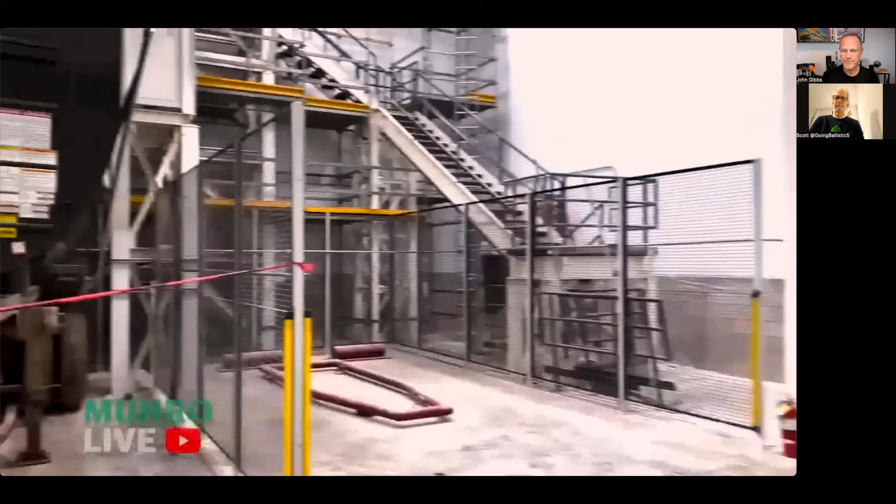Recycle everything. We had to make a separate scrap yard for the stainless. So this is just a scrap yard for the stainless coming out. We'll go out the door over here. We're about 80% utilization on the nesting.

Yeah. 80. That part was worth calling out because Sandy's mind just went. It happens several times in this video where you see Sandy's mind just explode from the information. Right. And I think what they mentioned there is, they get the blanks that are coming out and then they're cutting them. And he said that they're using nesting. That's why they're able to save a lot of material.

And for those who don't quite understand nesting, it's Christmas, making Christmas cookies, you get the batter out, and then you have this form. If you're really inefficient on how you put that form down, you're going to not have as many cookies and you're going to waste a lot of batter and have to recycle it. So the whole idea is to nest your parts as closely together so you use as much material as possible. And Sandy's a bit blown away that they were able to do 80% because I think he said it's usually around 60% or something like that.

Right. And Lars immediately responds and says, well, if you suck at doing what you're doing, then it does. But anyway, it's amazingly high. Well, they're pretty square panels, so they're kind of easy to nest. Yeah, I guess so. It's true. If you're making Christmas cookies which are square, it's a lot easier than the ones that are shaped like a Christmas tree.

Right. And they're going to talk also, we're just about to go watch them unroll the stainless steel. And by the way, I want to give both of us a little bit of kudos because we did suggest that they were doing laser welding on the door, and we're going to get to that part where they do the laser welding. That's going to be interesting. We were kind of right and wrong about a few things on there.

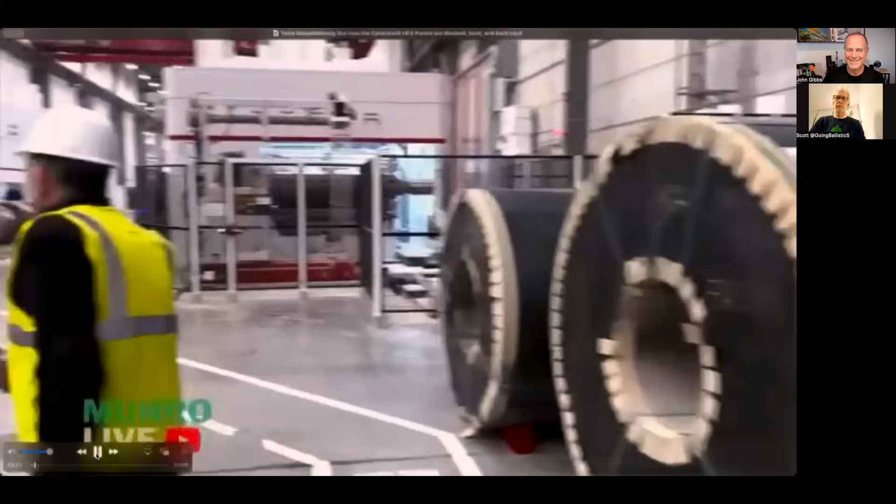Hi, good. How are you? Good meeting. Yeah, so he's the lead engineer here for our straightening line. This is Dan. He's our head of shop stamping. Hi. Nice meeting you. So we're just going to walk you through real quick. We'll come over here and we'll look at it. But basically, we get coils in, we feed them in on this side, and out on the other side comes micron precision level blanks.

Right. And that's worth pointing out. Micron, I mean, Elon said that in that open letter, or the leaked letter. He said we needed micron precision, and they say that multiple times in this tour. And that's not simple. I mean, we're talking about cutting things. No, it's not. It's just crazy.

And also the amount of care they take, and I know they specify A and B sides. So the A side is the side that you can see, and the B side is the inside where you can't. So they don't care about scratching that, or if it gets dinged up a little bit, that's not as important. So anyway. No, turns out Rich had me covered.

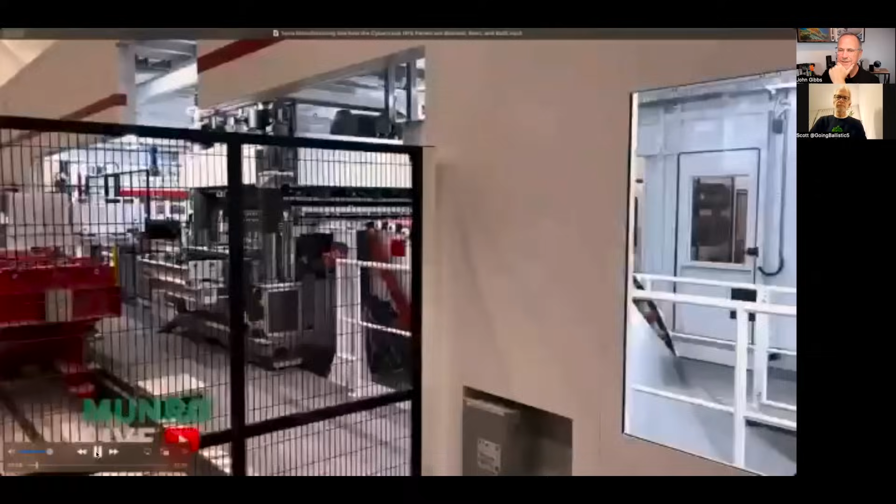So this is the first of its kind laser blanking line. What it does is it takes coils, it unwinds them, and it's taking out the internal stresses from the raw material. It's passing them through something called a leveler. All it's really doing is it's got a bunch of work rolls and they're moving up and down, and they're flattening the part. So I think that's worth pointing out because that's just crazy.

I mean, so you're going to do these different rollers, right, that undo it. And I think there is a YouTube video out there from Schuler that sort of shows a little bit of what that process looks like. Right. And of course, they're using probably normal steel, and this is stainless steel, so it's going to be a little bit trickier to try to get that process to work. And the other thing they're afraid of is that when you're doing that, you're potentially working the material, which just means you're going to be changing the properties of it. So you have to be very careful how much you do it.

Right, because certainly I'm not an expert in material science, but crystalline structures, if you put them under, because you might think like, oh, just roll it out and squash it and it'll. Well, you've heard of things like cold roll and stuff like that. Those are designed to intentionally change the properties of the material that you have. Right. But it sounds like pretty much they don't really want to change. They're happy with what they have here. Right. It came from the mill the way they wanted it, and they don't want to make any changes to it. So they have to be very careful. They have to flatten it, but they have to not flatten it too hard.

So yeah, clearly there's a lot of experimentation that went on. They talk about this. They're like, oh yeah, we started with 3 millimeter stainless steel. We worked it down to 1.8 and all this kind of stuff. Want to be careful that we don't work the material too much, because you do something called work hardening, and then you shear the part later on. Right. So this was a special development as well. This is something that's primarily used in mills. So we actually source it for a blanking line.

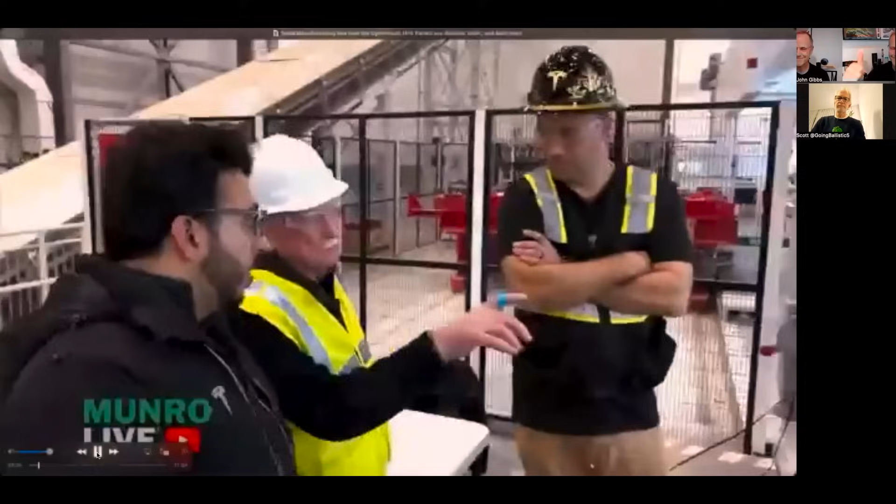So anyway, obviously they're very proud of this. They have been able to reduce the thickness of the stainless steel by almost half, 1.8 and 1.4. And later on, Sandy talks about how you just want it for bulletproofness because the doors are 1.8 and everything else is 1.4. But it actually turned out that it was side impact. So with the extra thickness, 0.4 millimeters, the doors are stiff enough to take up 75% of the impact of a vehicle side impact, which is very impressive. I have a feeling that being inside this truck is going to be one of the safest places you can be on the road.

Probably. Yeah, especially because not just the exoskeleton, but also the door frames and everything, all of that stuff is stainless. So it's just a massive block of stainless steel with you inside of it. So it should be pretty darn safe. But anyway, very impressive stuff watching how they're doing this. And I believe we move on to the laser cutting next here. That's where we started. Yeah, correct. So let's see, oh yeah, here we go.

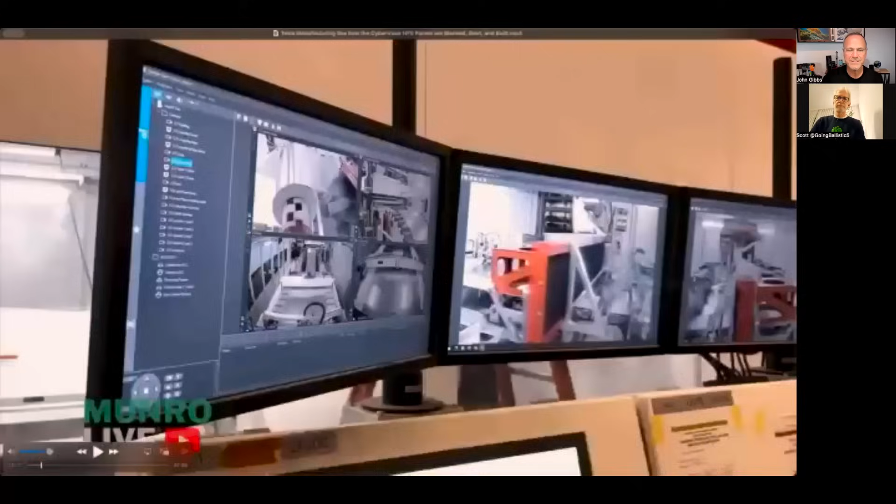It's actually designed for 3 millimeter, but it's good that we're not using it. That's where we started. Yeah, correct.

So, oops, sorry. This shows a good overview of the line. So you have the uncoiler, as I explained, where the actual raw material, we call that a coil, is being loaded.

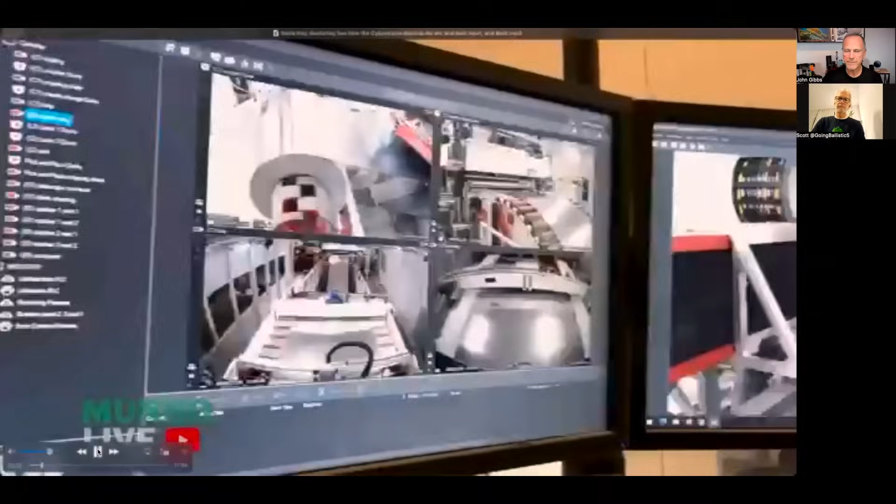It's being unwound as we speak. It's going through the leveler or straightener, depending on what you want to call it. Then it's going into the laser booth, which is what you see right over there. It's airtight, light tight because of emissions and whatnot. And these are two lasers working in tandem.

Okay, and right now it's airtight and light tight. That's very important. For light tight, it means there's always a possibility of a reflection somewhere in there that could come out, and someone just happens to be looking in the wrong direction at the wrong time. They could be blinded. So those things really are light tight. There's no way light can get out of those cells.

Yeah. And the airtight is also very important too, because as you're cutting the metal, there's fumes coming off of that. So they have to have some sort of a fumigation hood that pulls out all those toxic metals. So I'm trying to look. At some point they actually show a little bit of a close-up on the camera, and it shows it's cut at 1 millimeter. This was a special development with Tesla and Schuler.

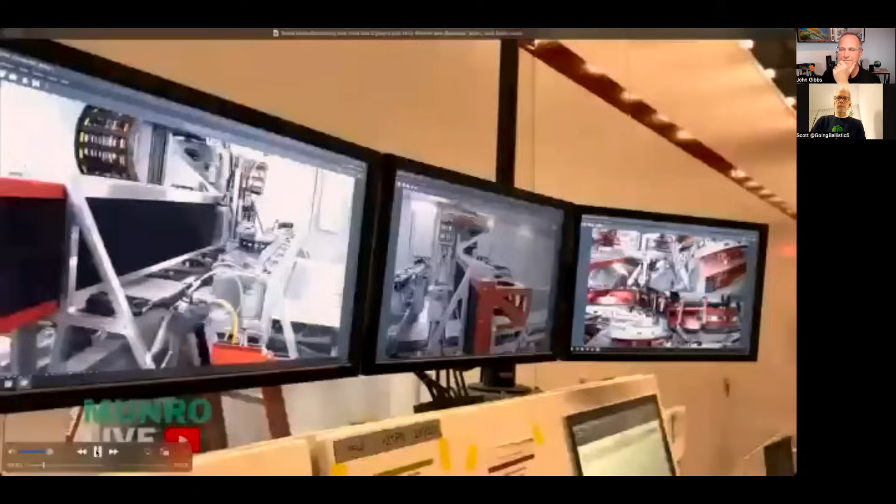By the way, big shout outs to Schuler and Kuka and Fanuc and one other one today. It was Trumpf? No, I think the three were Schuler, Trumpf, and Kuka. That are Sandy's three favorites. Yes, they are. I just meant that Lars and team, it was nice shout outs to all those companies. It was very cool.

So anyway, these guys, it looks kind of like an inkjet printer with the big cable that runs along the side. It's basically 2-axis. Yeah, it's 2-axis because it's a 2-axis problem. So he said there are two working in tandem. Do you have any idea, is one cutting from the bottom and one from the top? I think maybe they just have two to be able to do the production rate that they need. Oh, so one's working on one side and they work their way to the middle or something like that? Or are they just cutting different blanks?

There it is. Yeah, so you can see that really quickly. That thing's like bang bang. That is a very powerful laser cutting a tailored blank. And I assume it's cutting right through that just that quickly. Just zoop. It cuts really quickly and very precisely, of course. And when you think about that precision, even a laser has some width. So when you're cutting it, let's say a 0.5 millimeter of width, that means you have to figure out what the give is.

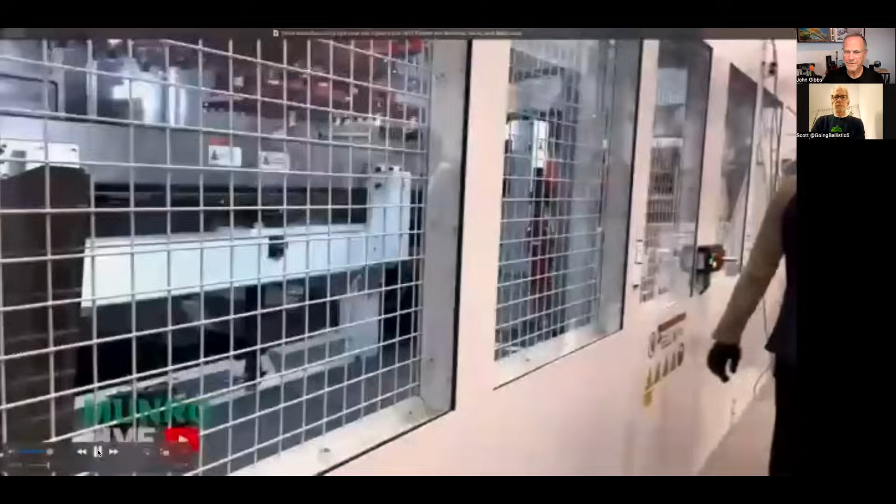I'm going to fast forward a little bit here. This is one of our transfer presses, the smaller one. We just make small parts there. We actually insource about 70% of our stampings for Model Y and Cybertruck. Wow. It's quite a bit. Well, when I did the study on why we should use castings, that study cost me a lot of time.

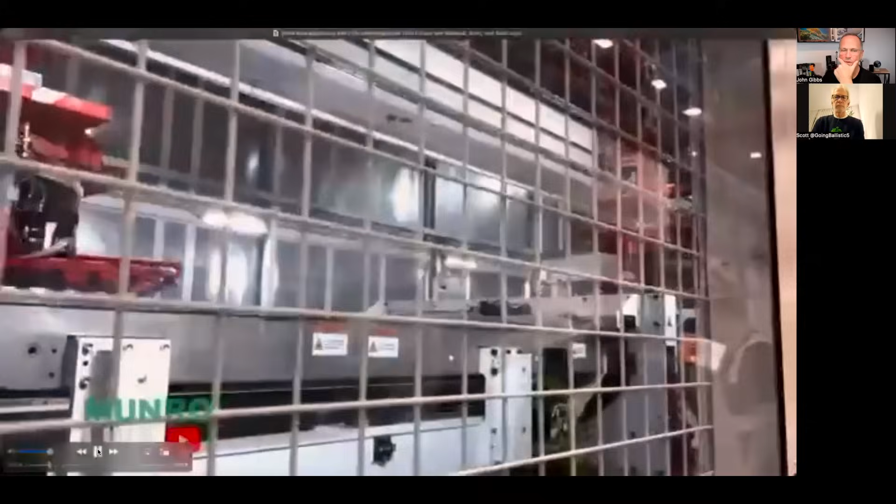So this is just separating the good parts from the bad parts. Because, as you saw in the laser, everything's being cut on one sheet. So the good parts are being separated, and the bad parts actually go right down there. That's what you see. It's going underneath and then up into the scrap house.

Scrap. So Scott, what do you think about the scrap house? Is that going to go straight back to whoever manufactures that steel and they'll just remelt it? Yeah, I think so. I would think that's probably the idea, that it could go back and be reused. So the chemistry of it isn't going to change that much? Yeah, I would think it would be easier to work with that than the original, where you might have to smelt it from original ore wherever they're sourcing it. Okay, that's what I suspected, but I didn't know for sure. Alright, scrap in there. Let's go through this a little bit faster here.

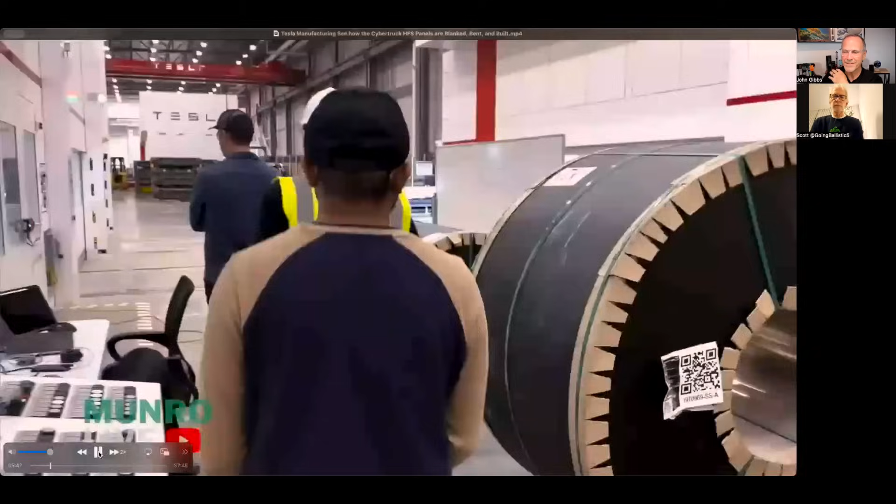There's some. You see, we're stacking them here. I think what he's talking about is that right now they're looking at all the blanks that are produced, and if one of them doesn't pass some sort of inspection process, they just reject it. I don't think he was talking about scrap at that point. When he's talking about good and bad parts, it means one of the parts did not pass. Still, you're recycling the bad part.

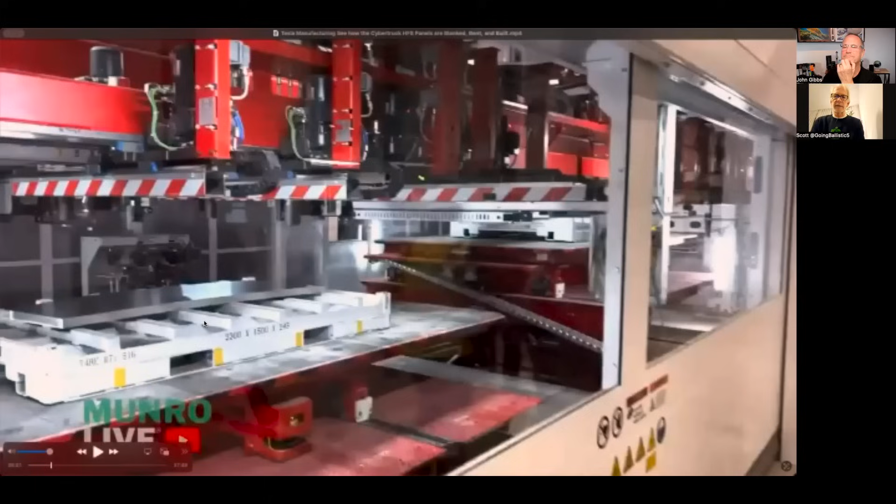But if I'm not mistaken, in this part he actually shows a whole bunch of these things stacked on top of each other, which was a little bit mind blowing, because if there's any kind of sideways motion, they're going to get all scratched up. Yeah, and that's what they were concerned about, just to make sure it comes down and lands flat. They talk about that explicitly, and as they say, this is hard freaking steel. There's another word, but it's HFS.

So what am I looking at here? This is basically storage. You're just carting them, bringing it together, right? Correct. So overhead conveyor belts, parts come through. Look at that one drop, and we just stack them up. It's very important. The only thing that really can scratch HFS is HFS. That's right. So we got to be careful when we put it down that we're not rubbing it against each other. Exactly. The only thing that can scratch diamond is diamond, right?

Right. So of course, that's the one problem with this stuff: if it does get scratched, you're gonna have to chuck it. So it's got to look really good because there's no paint to cover it up. You can't prime it. You can't do anything like that. It's just what it is. Other companies will have the stuff coated. It'll have a plastic film. No, correct. So this is kind of big stuff all by itself.

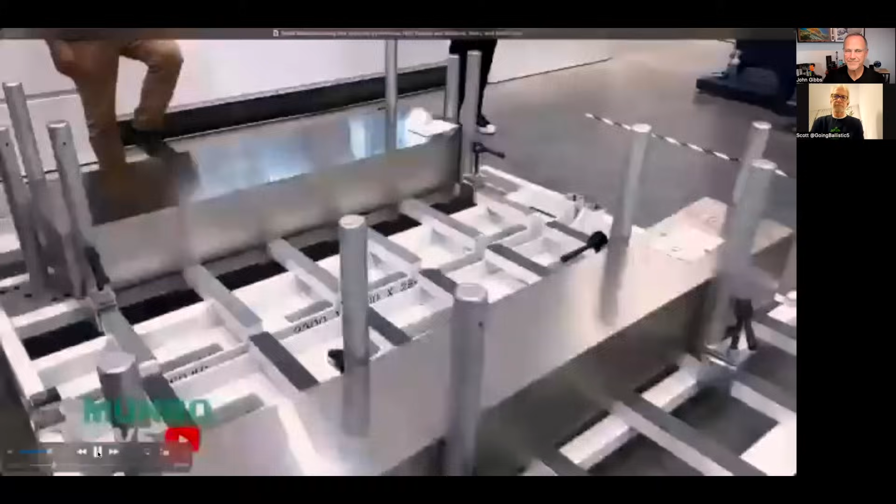So these are the different blanks? Yep, different blanks, all within accuracy. Tailgate, fascia, hood, doors. And then we have a measurement system. So we're producing hoods, and typically we robotically remove a part for periodic quality checks. So that's something you'd probably want to remove off the top when you're taking them out, just to make sure they don't get scratched as well. Would you do that with a vacuum? Yeah, probably a vacuum gripper of some sort, some automated system to pick them up.

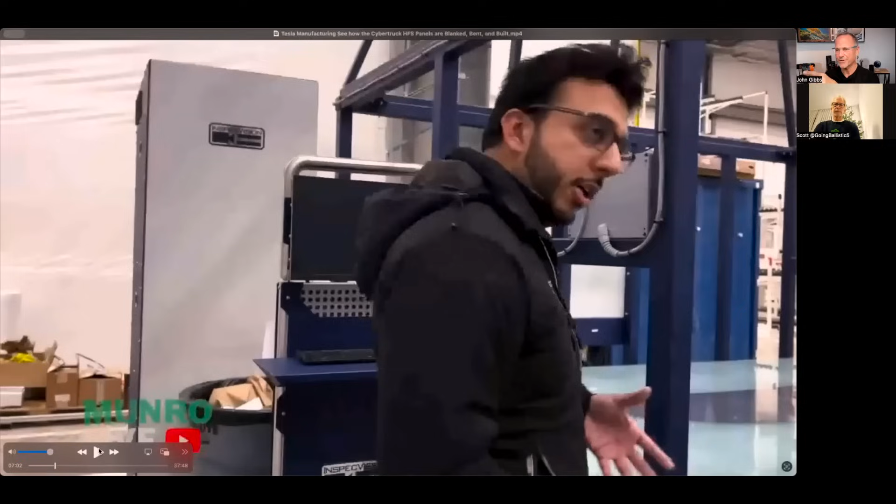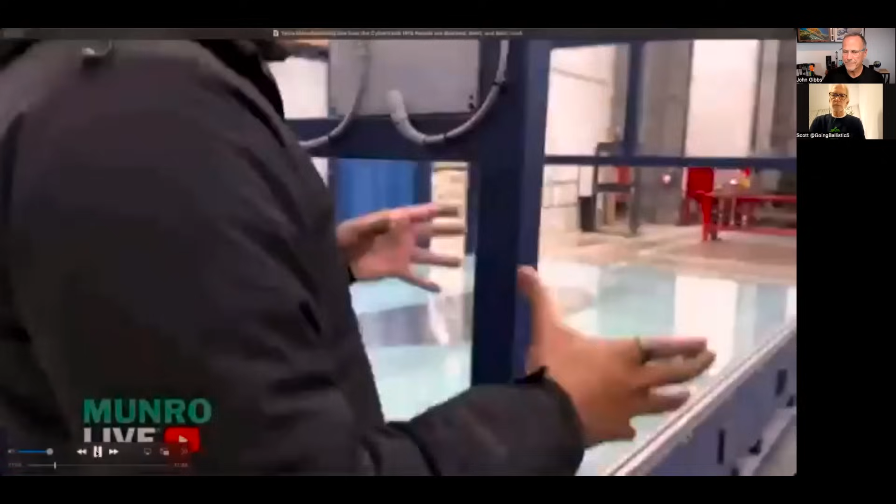It sounds like they are not testing every single part here. It sounds like this is a statistical sampling. Could be. So we'll take the part, put it on here. It's just a nice fancy 2D light scanner. And what it does is it compares the CAD that we're cutting to in relation to what we're actually producing. So this part's pretty cool. So it's like a giant optical comparator.

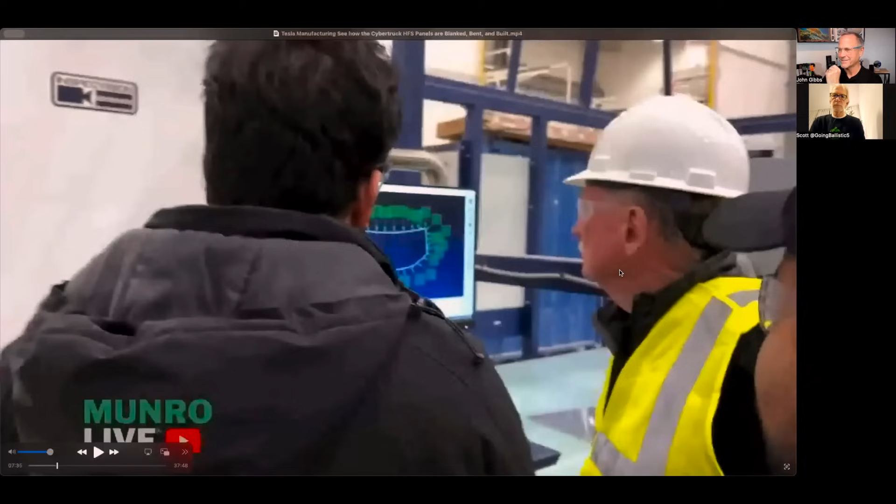So just watch your eyes, everyone. It's going to turn on. Takes a picture. Hopefully my arm didn't get in the way. No. All the points are within spec. That's measuring the outer contour. You see this level of micron precision here? It's really hard to see, but I believe all those little things are flags that say numerically what the error is. Very impressive stuff. So 7 microns. Let me zip through a little bit here.

Okay. All right. I can't remember what the next part is, but we'll find out in a second.

Melt center. Okay, good. So this is our die storage area, and I asked him to open up because the inner panels are also stainless, but they're formed, right? Because the best way to get section is to have an inner and outer, right? You get a lot more section. So forming, okay, so that's obviously important there, is that you've got the outside part that you can see, but then of course there's the inner part of the door.

Now we knew the door had an inner part, but we assumed because they looked to be stamped that they must have been aluminum. But they're not. They're stainless steel. That's so crazy. I mean, the whole thing was, it's really hard to stamp this HFS because it is just so freaking hard. So how are they doing that? And it's rather shocking how they do it when we learn about this.

So yeah, this as an A surface is kind of hard because you get drag marks, whatnot. And so we had to work hard on this process as well. This is our front door inner. It's a two out die. And you can see this coating. We went through a lot. Aluminum bronze coating here in the inserts to make sure that we don't get those drag marks on the stainless itself.

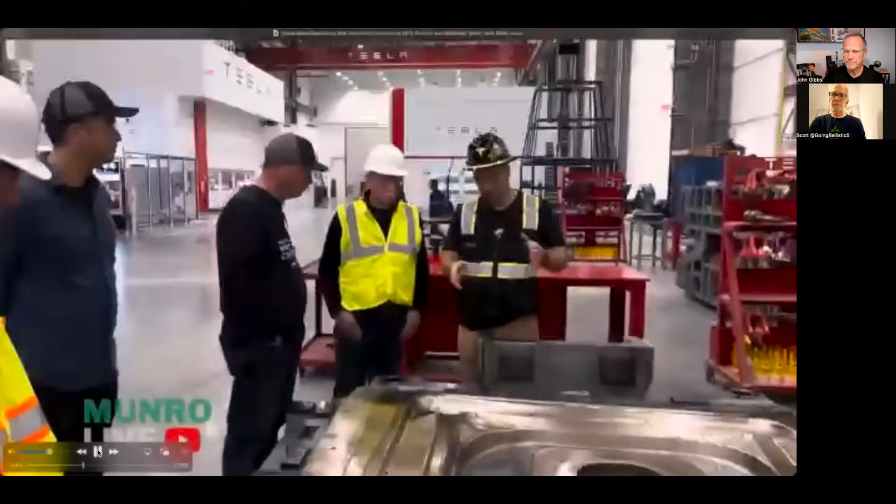And I think we have the world's fastest, first and only high-speed A-class surface stainless press. We're making 10 strokes per minute over here. That's it. First and only, they said. Okay. Yeah, I know, right? So it seems like they're doing it in one shot.

And the other thing that's shocking is what they coated it with, and that is bronze aluminum, which I guess they're just sort of repairing as they go, right? That's what they said. Yeah, they have to. So they probably have something really hard underneath it to be able to do it. And then they have a coating of this on there because the only thing that you can scratch it with is with something of the same hardness.

So you put something that's softer on there. But that kind of goes against your rational thinking. You say, yes, but if it's soft, you won't be able to get the forming, right? Because it's going to be too ductile. It's going to wear out really quickly. So it's like, wait a minute, how can you make it out of material that's absolutely crazy? And of course, we find out, and we'll let Lars say how many cycles they're able to get out of it.

Now, normally, the overall die itself is very expensive to make. And you have a CNC machine that's cutting it, and it could take a long time just to cut out one side. You're going to have both sides of the die. And then you make multiple copies of it. And of course, you have a lot of other different dies. So you would take that out of your press and then put in a different one to start pressing another kind of part, because usually you don't have as many presses as parts that you need to have.

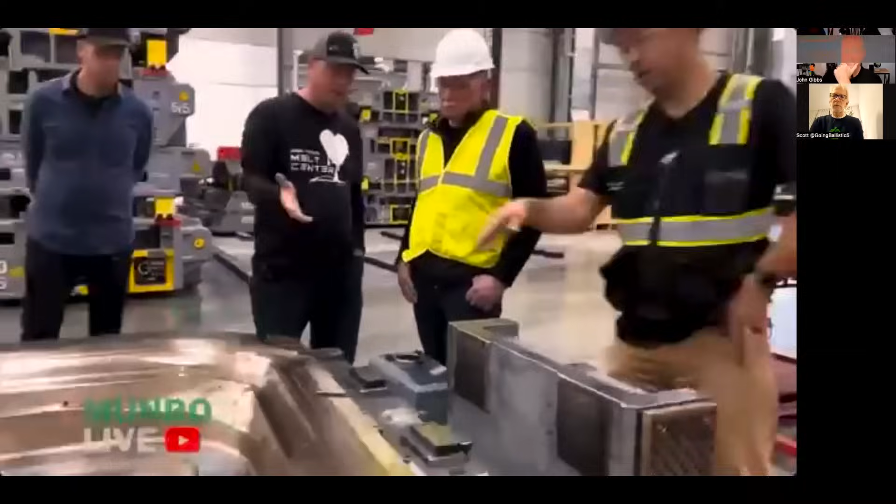So roughly 600 an hour at 100%. Again, this is the front door inner, like Lars stated, dual. And then this is the outer lower half. This is our draw in the upper half. Wow. Crazy. That's 10 per minute. That's pretty nifty. Isn't that nuts? Isn't that just absolutely crazy?

And then of course we've got kind of an opposing side, I guess, or is that the negative? Yes, two sides. The positive and the negative, if you want to think of it that way, the A and the B side. Right.

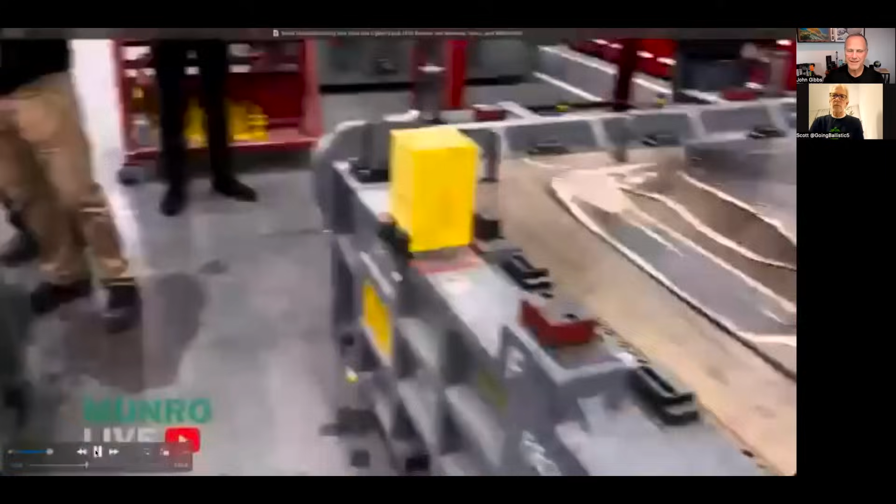I've never really stamped stainless steel without a coating. I don't think anyone has. There may be, but not me. We're all learning. Certainly not for an A surface quality part. There might be people making stainless steel pots and pans, but then they polish them, right? Polishing is the biggest cost with pots and pans. The stamping, deep draw, whatever, super easy. This though is something I've never seen before.

What'd you call this? Aluminum bronze alloy. How do you coat it? It's actually the whole material. It's not coated. This is aluminum bronze, the whole thing, and you can stamp with it. The whole material is hardened. We don't have a coating on top, but we found that it was the best material to use.

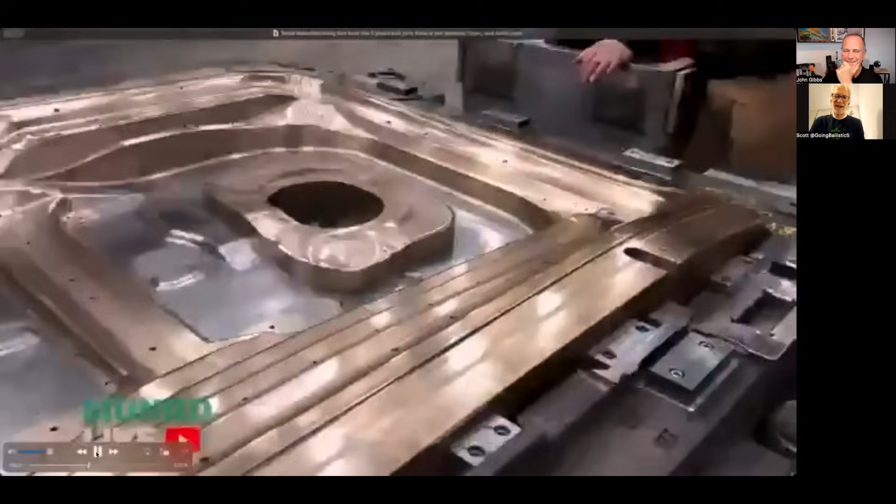So explain that to me, because it seems surreal that they can do that. For a second I thought they must have a hard material and just coated it. And he says no, the whole thing through is aluminum bronze. Wait a minute, how can that be? Then they somehow harden the surface on top with some sort of heat treatment to make it a little harder. But still, it means it's not going to survive a very long time. It's crazy. Let's find out what they talk about here.

You could hear Sandy Munro also going like, what? That's not possible. You can't make the whole thing out of aluminum bronze. This is first principles thinking here, people. Just because nobody's ever done it before doesn't mean it can't be done. You just have to think about it.

And part of it is also I think it's able to slip along it. He was talking about coating with a lubricant to make it a little easier. They may be doing that as well. But also that material allows the stainless steel to flow over it a little better and not get caught up, which otherwise would make the stamping very difficult. He specifically talked about drag marks. You don't want drag marks, tearing, everything.

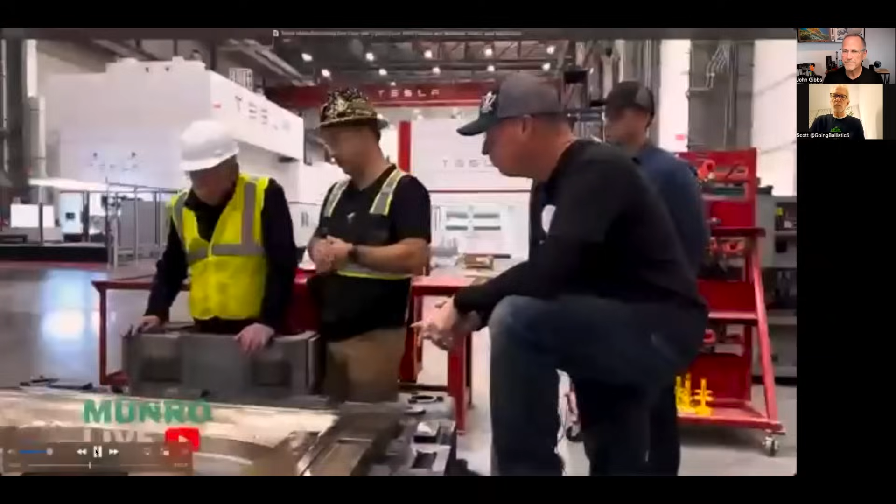We're still playing with lubricants, what kind of oils we're using, how much. So we're still dialing it in. Because when you use steel, we get drag marks. Aluminum can't last, right? So we obviously have to replace these inserts in a reasonable amount of time, but they're lasting quite a lot longer than we thought they would.

How many hits do you get on this thing? How many have you stamped so far, and how many do you think you're going to get? So far, we've probably stamped about 1,000 to 1,200 of each part. Based on our prototype trials, anywhere from 50 to 100 before we start doing rework. But you rework a stamping die nominally every time you take it out a little bit. We're not going to throw the die away, just rework it and make sure the finish is there.

Most of our PIST scores now are in the upper 80s. PIST is our points in spec, so we try and get 100%, a perfect spec, zero nominal. We're upper 80s, 90s.

We're currently in the upper 80s. Started in the low to mid 70s, now in upper 80s. Every run we try to improve. So that's worth calling out too, is that they're iterating on this. Now, what they were saying, and this is where he talked about 12.

Sandy was asking how many hits you get out of it, and we're hearing like 1,000 to 1,200, and then Lars is saying 50 to 100. Which numbers did you hear there? But is it 50 to 100,000 that he means? Is that like 1,000, 1,200, 50, 100? Yeah, because that's a pretty small number.

Because if they were doing it, what was it, 10 a minute? That's every 6 seconds. That's like 5 minutes. You're done. It's time to get reworked. 1,000 would be a little bit more, and if it's a number like 50, I don't think you're going to get a whole lot with such a soft material. Right. 100 seems like a small number if you have to keep on changing the dies out.

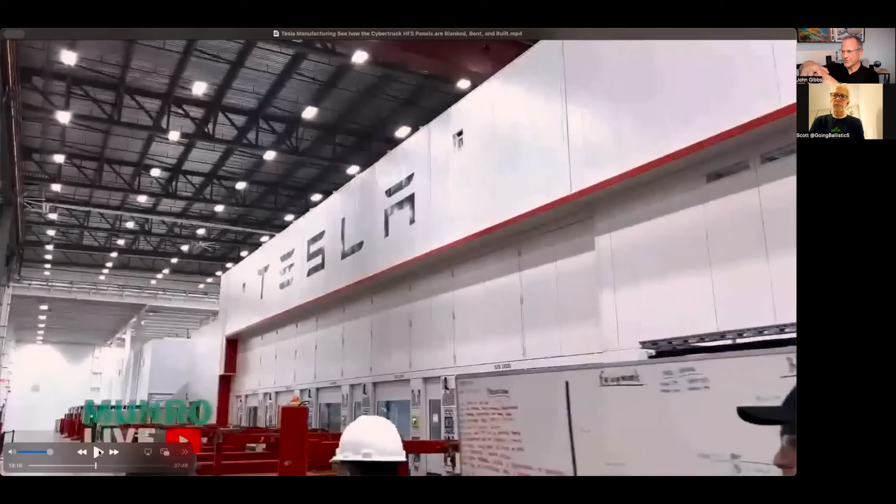So that sounds like that's what they're doing. They're heating it up, squishing it between there for 6 to 8 seconds, running water through it to quench it and get it cool again. So they're definitely changing the material properties of those panels in that case. But again, maybe it's a different kind of stainless. Maybe the outer one is the HFS and the inner one is not quite HFS.

Exactly. And if they're quenching it, they might be getting the material properties back that they want. So you get more of a liquid thing and then it recrystallizes as it cools. I'm sure they control very specifically exactly how fast they cool it, with metal.

So this is made by AP&T out of Sweden. We have a second one coming just to the west of this one. So you come in here, you see these ovens. This takes it off a destacker where it's centered, then it loads it into one of the 21 chambers. Then another one pulls it out and loads it into a centering table. It's centered, then it gets transferred by a last feeder into the die.

We can see the die over here if you'd like. Sure, why not? Is it not working right now? No, it is. Each one of those chambers is a different door with a different panel, heating up. We can go to the forming side. How much time does it take for heating up? We got 21 stations. So total strokes per minute on this is also around 10, 12, right?

So if you multiplied that by 10 hours a day, just to be conservative, that's 1,400 a day. That easily covers your 5,000 a week kind of target goal. So they're making them at a sufficiently fast pace. At 100% OEE. At 100%, yeah.

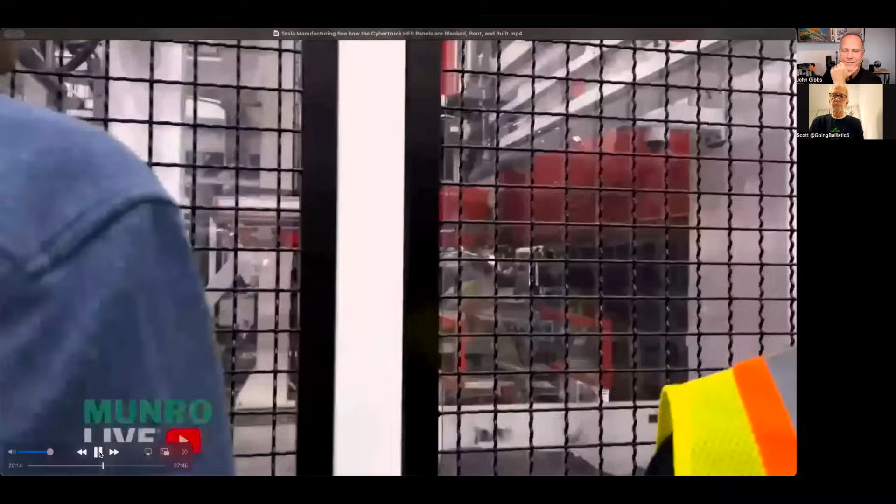Probably also the longevity of the dies too. Yes. So when they come out, come back in. Yeah, and that's the only way you could probably do it in one shot. Otherwise you'd have to have multiple stampings. Right. And it also explains the outer panels they talk about later. They're like, we can only bend it a tiny little bit before it starts to crack.

But obviously 900 centigrade is quite hot. So not melting, but it's hot enough that it's glowing, that's for sure. Yep. Yeah, it's going to be very soft. So yeah.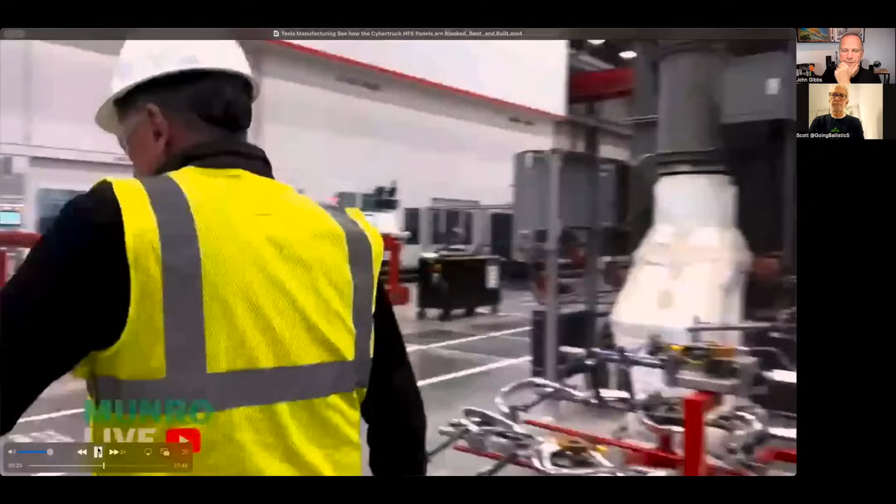So as you can see with all the equipment, we're ready to roll at high volume. Now it's just like, how do we ramp? Go slow, get quality right. So yeah, what do you think? I'll ask you that question. Do you think from looking at this that they're ready to go at high volume?

Oh yeah, they definitely have almost everything they need, and now they're just deciding what the ramp-up phase is going to look like. Right. How quickly they want to start pushing everything. So it seems like they're pretty pleased that they're getting the quality that they want, and then they'll increase the speed a little bit and a little bit and a little bit.

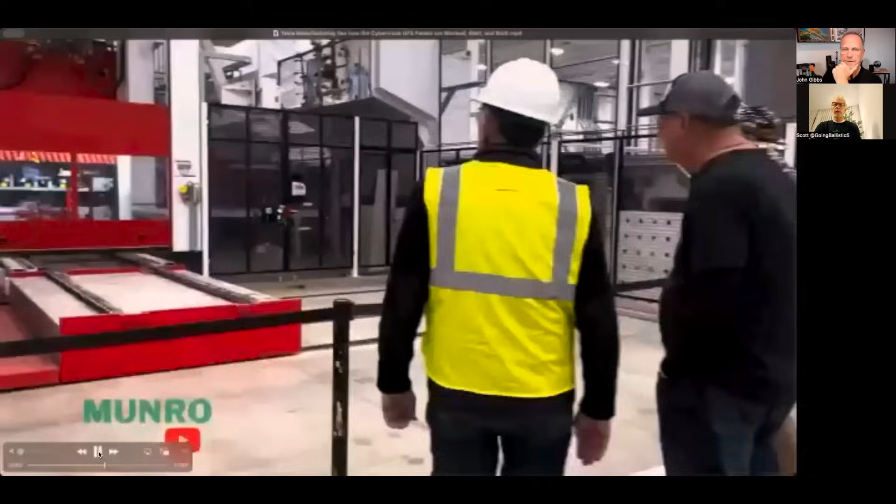You don't want to go too fast too quickly, because then you might break something. Right. Then you begin to learn, double check everything is going all right. So yeah, it's called a ramp for a reason, not a step. Yeah, exactly, a ramp.

And this is one of those things where, again, they could have delivered 10 trucks and been like, hey, see, we're in production. Sort of like the GMC Hummer, or the GM Hummer, whatever, it's like, hey, look, we're building these machines, but you're making 20, 50 of them a year. This is clearly not designed for this. They've clearly thought a lot about how to make on the order of hundreds of thousands of these a year. Yes. Exactly.

Right now we're doing inners, inner left. Okay, so this is them stamping the doors. I guess all these guys hung around after their shift too. This was very nice because it's clearly evening as they're walking around. Thanks.

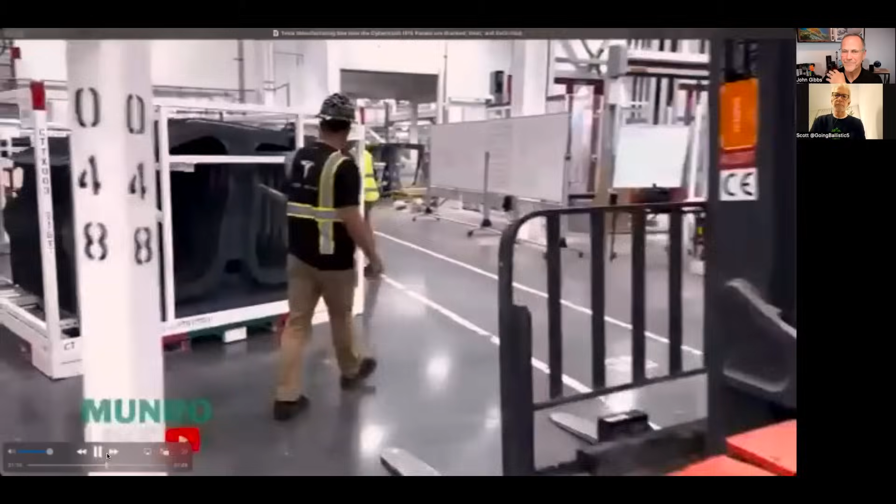And then you get your doors. And here's what they look like when they're done. This is a body side inner. Check for heat, it might be a little hot. No, it's not even warm. You know, it'll cool down fast.

We're actually going to unload this with a robot, basically an automatic racking system. They're going to automatically get put in these racks, and we're going to take them off with forklifts. Right now we're not 100% ready to do that yet. And then they go up this conveyor, right? Well, not these parts, all the parts. They'll go up here, and we'll show you how we form the stainless. So boom, we got our lift right up there.

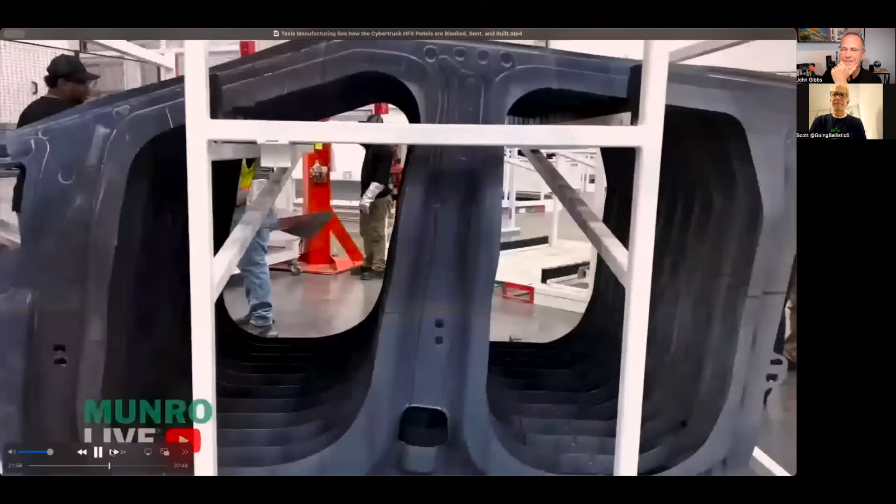We supply body shop. So obviously still things going. There's a later part where there's the bottom of a KUKA robot and no top, so there's just a base. So they're still working on all these things. Any other questions? No, I've seen a lot of this. No, I haven't seen one this size.

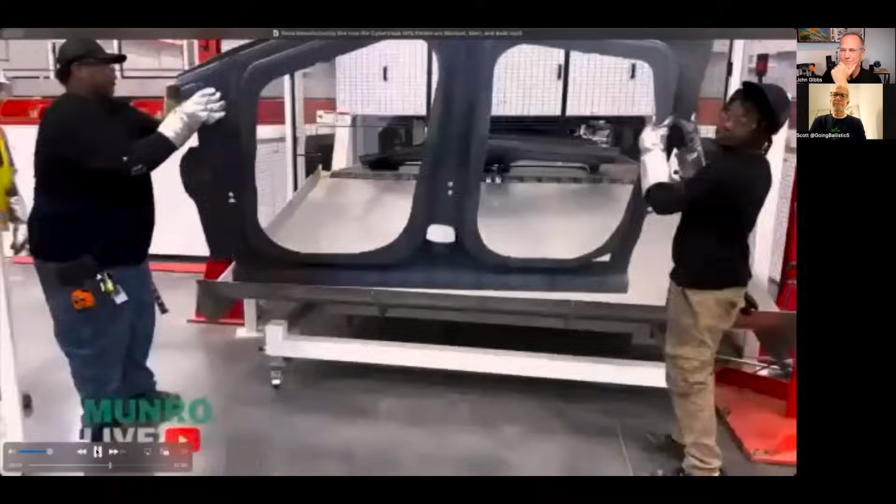We go up and over, Dan? Yeah, let's go up and over. So that's pretty impressive, just watching them pull that sucker out of there. So that part they're doing manually at this point is going to be roboticized. The panels that you saw, the blanks from the side, will come up here along with other parts. And then they'll move in. Right now it's all forklift.

You can see all our cherry pickers, that's the construction still here, where we actually have the body shop. Right. They had those big elevators. Everything's manual right now. Eventually they're going to be bringing more and more automation along that line. And it sounds like right now going up and down is not automated. They must be doing it on some sort of elevator or cherry picker.

But eventually it's going to get automated. Second floor here, that's unusual. Yeah. Well, it turns out those are the least number of parts now. We're down to just over 100. So moving them up isn't that bad, and they're bigger, so we get fewer trips, and they stack nice, so we get a lot of QPC.

So we come in here to mainline, but we're going to go straight to doors because we're running low on time, just to show you doors from forming to finish. So kind of zigzag. And of course, the doors are probably the hardest part to build because there's the most structure in them. We're only running one shift right now, and nights are doing cleanup and construction and final debug. So it's kind of quiet here, but Werner and the team were kind enough to stay for you.

Well, so we can get it running. Thank you, very cool. I'm sure they were pleased to do this. Get a little publicity after years of hard work. So let's see if I can. Yeah, it's always fun to show off what you've been working on.

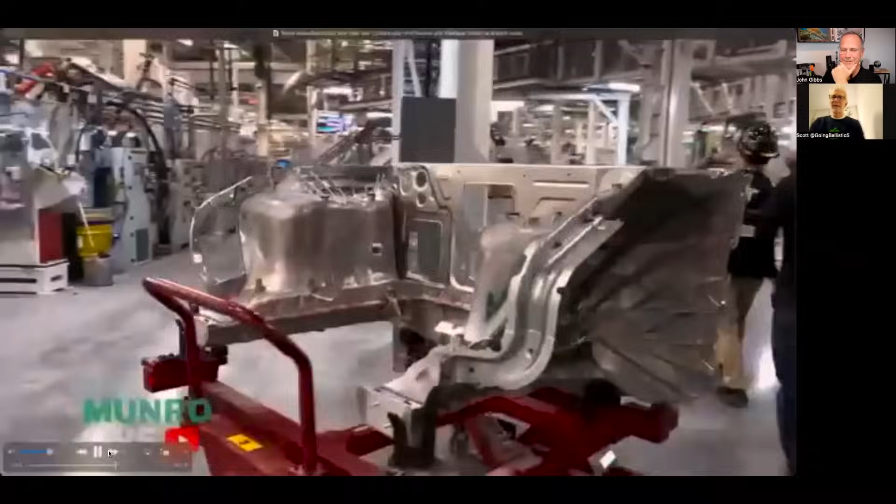And we got a little bit of a casting over doors here. Doors basically get built this way and go straight down to GA. The main line goes this way, and then gets transferred to our powder coat line. That does that black coating over there. We kind of have a flow.

But you don't use Elpo, right? What's that? Elpo, the stuff that everybody else uses. You dip the whole car in it, basically. No, you don't need to. It's a soft E-coat with a wet powder just for that black area. So we only have one oven. We do E-coat it, basically to seal it and cure the sealer. And then, because the door rings are that boron steel, we need to coat it. So then we put the powder coat on for the aesthetic.

Okay. So all of that black stuff we saw in the factory tour, if people haven't seen that, watch the video, I'll link it at the end. But it's a powder coating. So pretty standard stuff, it sounds like, just to protect it and give it a nice look.

We'll go this way? Yeah, we want to go to the rear door. Okay, we'll go here. I know that this bending line was running dry cycle earlier. I think the other one next to it, rear door, is actually running. Okay, let's go see the rear one. So we'll talk dry cycle, and then you can show them the rear one.

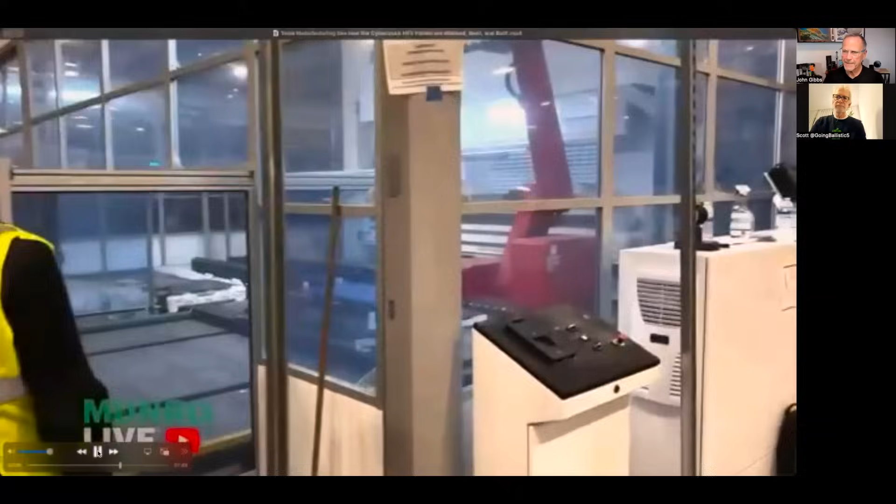So this is our TruBend. It's from Trumpf, we worked specially on this. This is the air bender I was telling you about. So cool. This is dry cycling right now. We have one of these for each panel. And how it works is, we'll come in close. Currently we're running dry cycles, so you can see any faults when we're off. It'll pick up the panels here from the stack that the guys made in blanking. Picks up a panel, and now it's about to pick up a fake panel.

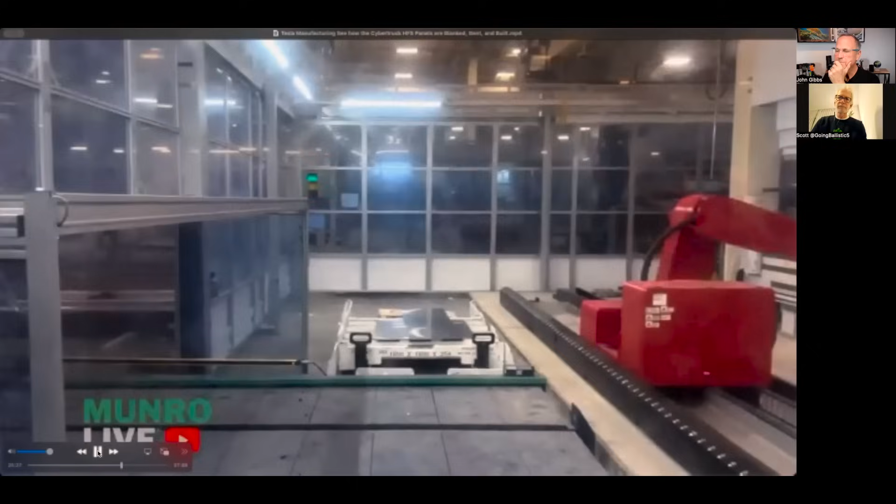So it picks up that panel. Looks like it's got suction cups. We'll show you the one working over there. And it's going to bring it into the TruBend, which is from Trumpf that we worked with. As you can see, the brake bend comes down, but that's the air bender. It has that V shape with the air flowing on either side to keep it floating, so you don't get the mar marks. Flips it around, it'll do the other side. And once it's done, it takes a good part and puts it back here, and it'll come out here. So we wanted to show the dry cycling before we look at the actual part, so you get the idea of the movements. It's very cool how it does that.

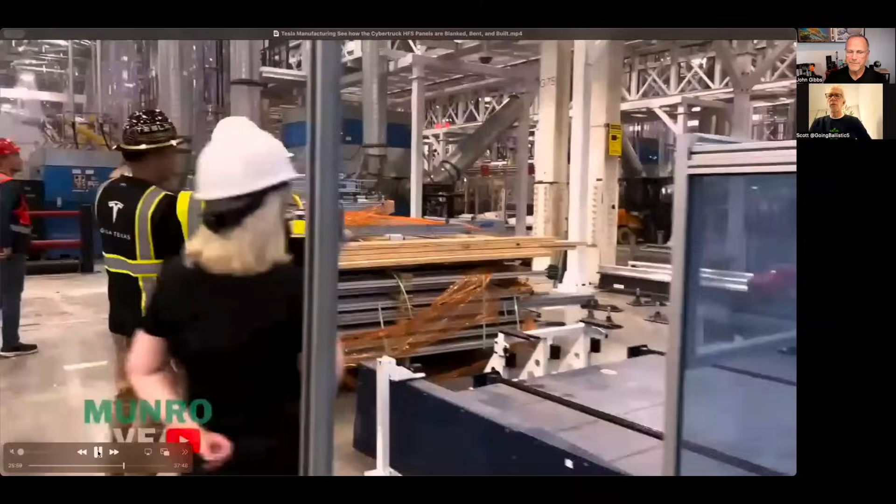Now, again, we're in the middle of commissioning all our transfers. That's a very custom kind of robot arm specifically for press brakes like that, because I think it's like a 5-axis arm, since you don't need all the degrees of freedom you typically have, specifically for press braking. And press brake is something people used to do manually. You take a piece of sheet metal, you put it in there, you push down the press, and then you learn to kind of bend it.

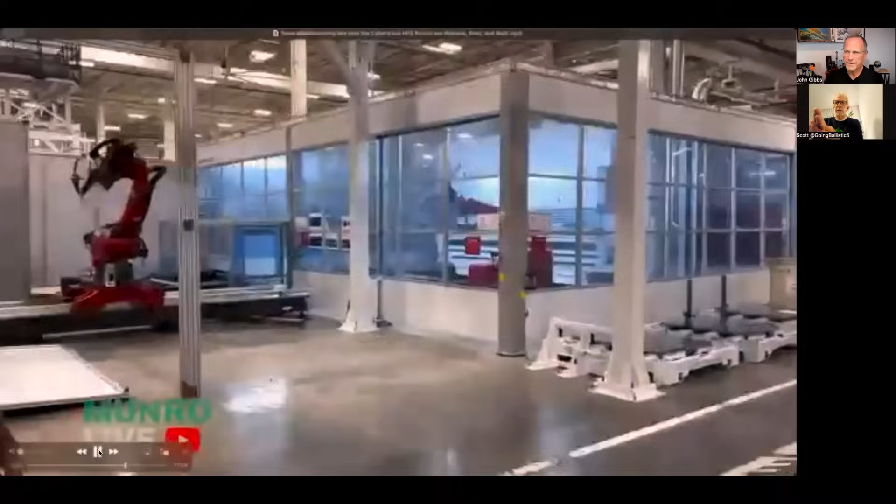And it was kind of a learned technique on how to do it. And it has to be coordinated with the movement of that die that comes down, that actually does the press into there, and a kind of coordination with it. And by understanding how the metal is going to be deforming, they're able to sort of change the movement of the robot to be exactly tuned to it. So that's why they're a very specialized piece of equipment, where it's not just a movement of that arm, but it's also figuring out what's going on with that press brake when it comes down.

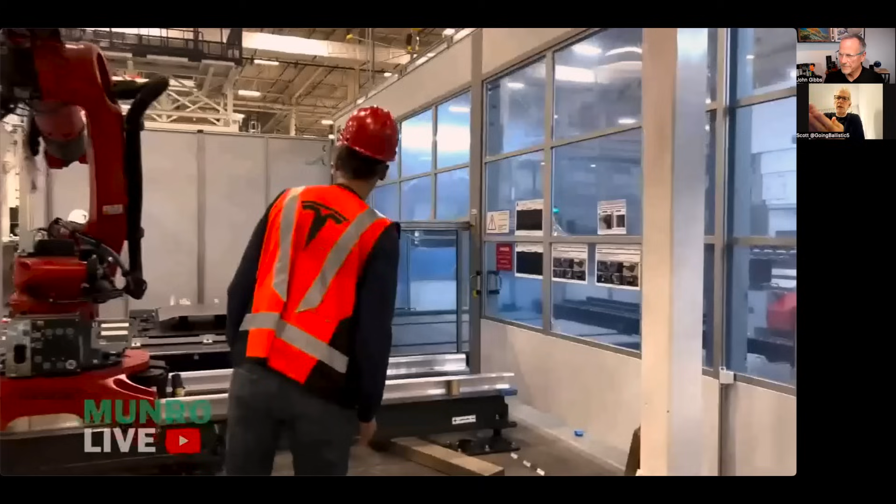And it sounds like they were saying that the part underneath, because you've got this die that's coming down the top. There's that little V shape, and they make the air coming in underneath it, so the metal never really comes in contact with the part underneath. That's the A surface. And they put it in, they bend one side, and then that arm is designed to do a 180, whoop, brings it right around, and then you do the other side. Which is exactly what we're going to see here.

And I believe they say that they're running at 25% speed here. So it's going very, very slowly, so I'm going to, let's see if I can, well, no, it's 5X. Oops. I guess I'll 2X it here, but anyway, so you can see that that little piece in the middle is the V shape, and that gets the inside of it. And then it spins it around, and it presses the other, and there you go.

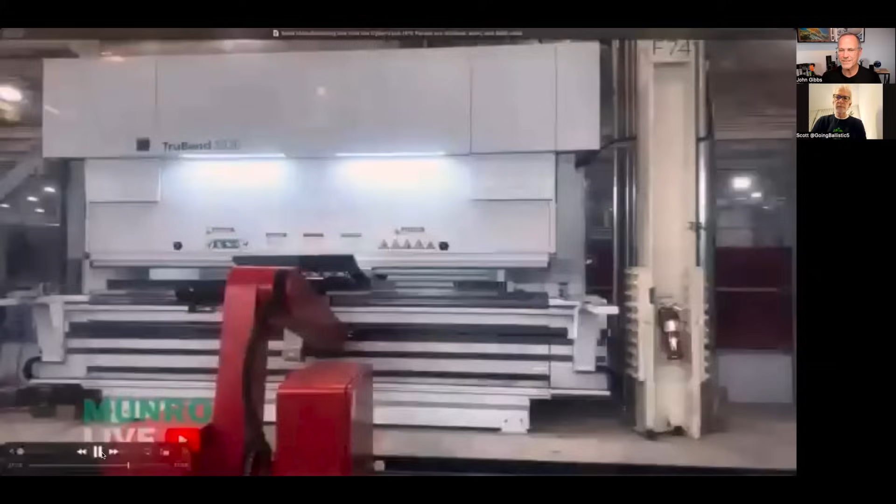And it's very interesting, because you can see it kind of working it back and forth, getting just exactly the right shape. Sometimes you have to do it a couple of times to go around there. And so the arm itself is 5-axis, and then it's on a track, which gives it kind of a 6th axis that allows it to go back and forth to where it's picking up the different stacks.

Yeah. And of course they also talk about how there's lights and everything. There's detectors that are looking at it to make sure it's bent the right amount, because again, one of the things about steel is you can bend it a certain amount, and then it'll give back again. So you have to over bend it a little bit, let it relax, and then figure out if it came back the right amount.

Yeah, actually, I might be wrong about that arm. I think that arm might actually only be 4-axis. I'm trying to look at it. It's like 1, 2. It's gonna be 3 there, and 4. I think it's just 4, because basically what's normally joint 1 and joint 4 in a typical robot arm is not in that one. So it's a 4-axis. So it is actually a total of 5, including the track.

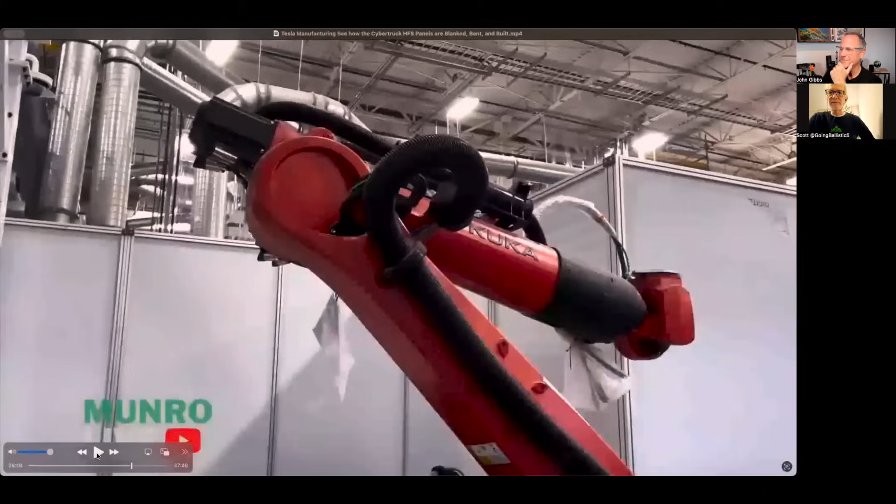Yeah. Okay. So it comes out. We'll put down the clean part here, and here we have the robot. Not quite ready, but wow, that base is huge. So there's the robot up to the part where the end of arm tooling is, I guess. So big boy. Why is that needed? They do make them bigger, actually. No, but I mean, why do you need it that big just to pick up a door? That panel is not that big, so it seems like overkill.

For the payload, it might just be the volume, the fact that you've got a very big part that you've got to pick up from one place and move over to somewhere else. It's more of the work envelope problem as opposed to the payload. And the other thing is, remember the payload also includes your end of arm tooling. So the end of arm tooling that might be needed to pick up the entire door could be quite heavy. Or that outer frame that they were showing, that itself might be pretty heavy.

Okay. Yeah, because you also have to have the vacuum nozzles and all that kind of stuff. So there's a lot of material. Yeah, and I'm not sure if they're using, well, what was this for? Is this for the outer panel of the door? I believe they said they were just going to pick it up and move it. That's what this thing is for. Oh, okay.

Because that should be pretty simple, because that's not a really big piece. I was thinking of those big door frames that we were seeing earlier. Right. But again, I don't know. But again, you might be right. It might have to move it such a long distance that you need a bigger one. Yeah, it's the reach. A lot of times the reach is going to determine the size, and then there's going to be a payload consideration also.

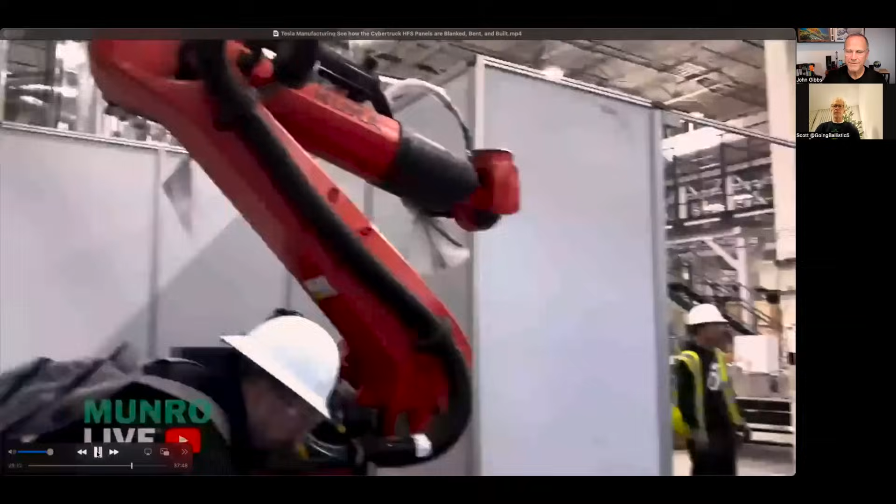Right. It's a good door. Let's do that. Yeah. So door comes out. Really cool how beautifully. And what did they say? Like 4 or 5 millimeters is the radius of curvature before it cracks. Yeah. So depending on where the arm is going to be, it's going to reach way over to get it. I assume it's going to be in a little bit closer, but you see, it does have to reach pretty far to be able to get that.

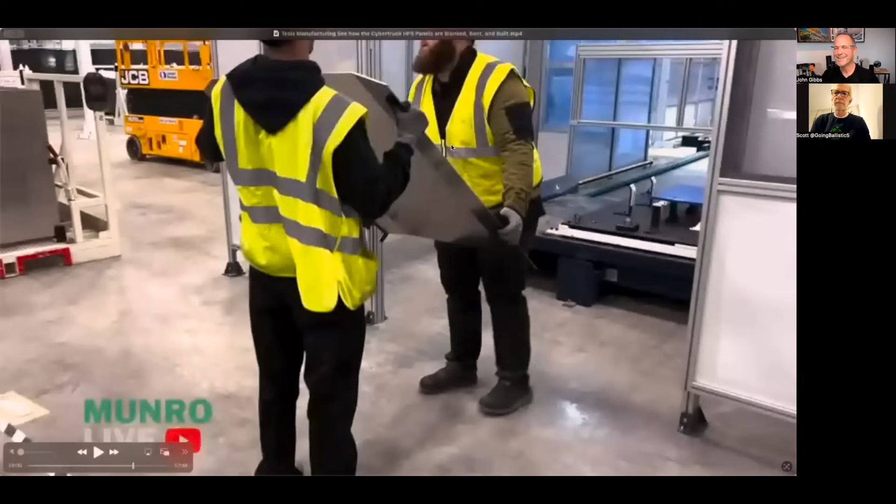Right. And there you can see, like, that's a pretty crisp bend right there. And obviously, I mean, this is not a light part. You think of, you're like, oh, aluminum on a door, that's very light, but it's taking 2 guys to pick this up right here. So it's stainless steel. Yeah. Steel, I think, is 3 times more dense than aluminum, if I remember.

Right. So what's the limit for factory workers? About 50 pounds per person, 45, something like that. Obviously they can lift more, but usually they don't want you lifting more than 50 pounds. Right. It's the same at the airlines. The reason why the baggage limit is at 50 pounds, you have to pay extra to do a little bit more. And then that suitcase has to be handled differently because 75 pounds is going to be a lot. Yeah. You have to remember that you got to do this for 8 or 10 hours a day. So it may seem easy, like, oh, come on, anyone can lift up 50 pounds, but try doing that for 8 hours straight. Yeah, that's going to suck.

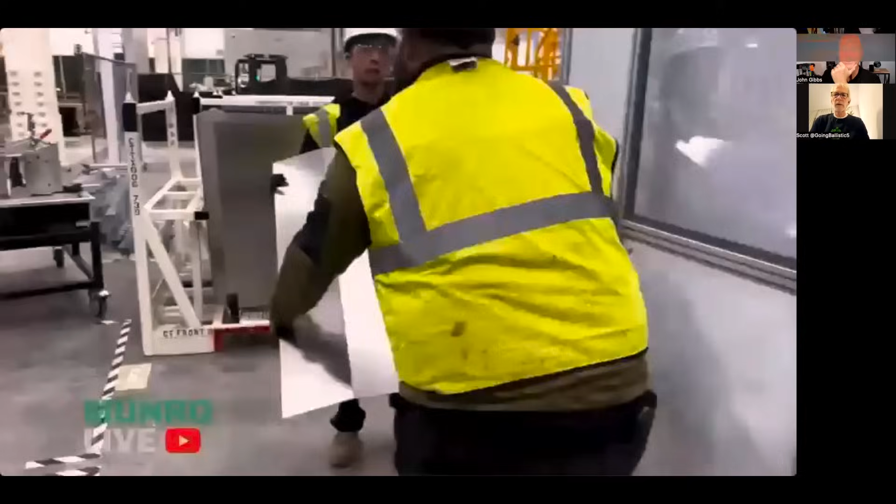So this is ready. As I said, right now we're putting them in the racks. Well, they ran out of racks. It really does look beautiful. But you want to put it in the check fixture? So also I put it in the check. The rack here, notice that the rack doesn't let them touch each other. So they're not just stacked up like books and rubbing and messing up. Yes, exactly.

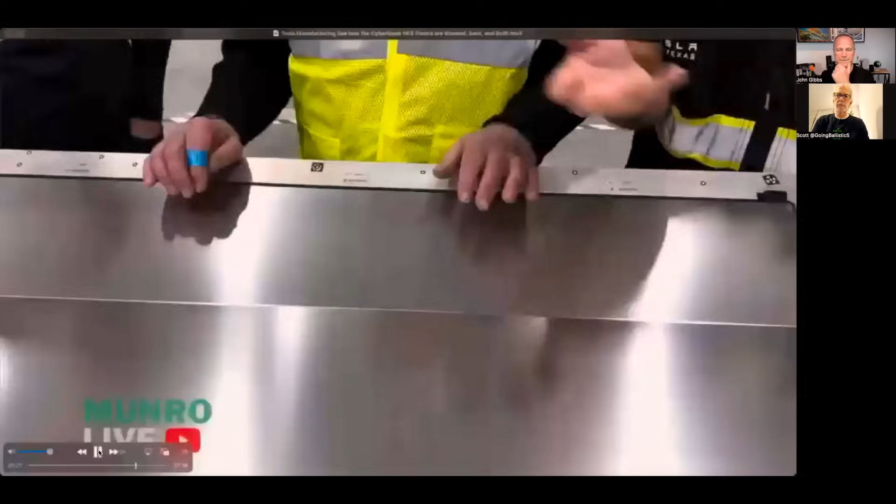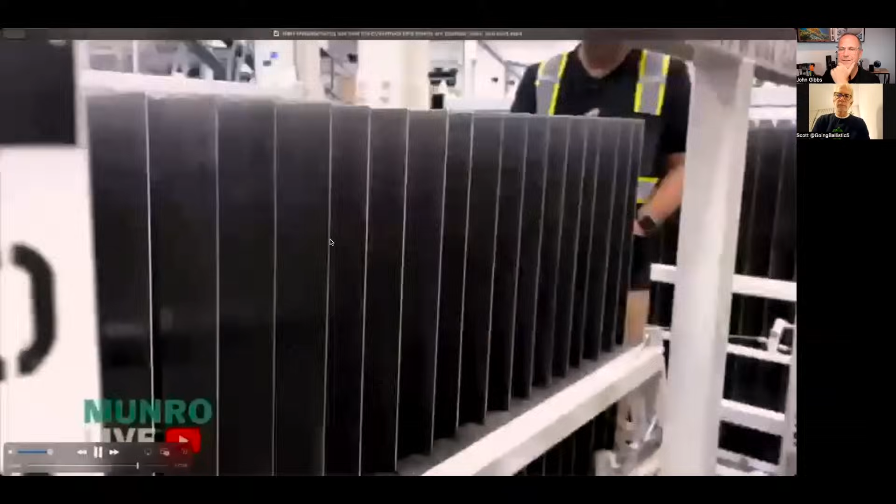Yeah, sure. Great. So I'm gonna speed this up just a little bit, but they put it into this little, I guess it's maybe a tester or something. Yes, right there, exactly. You can see we got a little more in here to validate the dimensions. What I was thinking about was just the outside bruising, not the inside. I don't care about it. You can see on these panels over here, if it gets bruised on the inside, no big deal. You can see where the air's blowing off the dust. But you come over here, nothing. So yeah, each one's got its little spot to sit in.

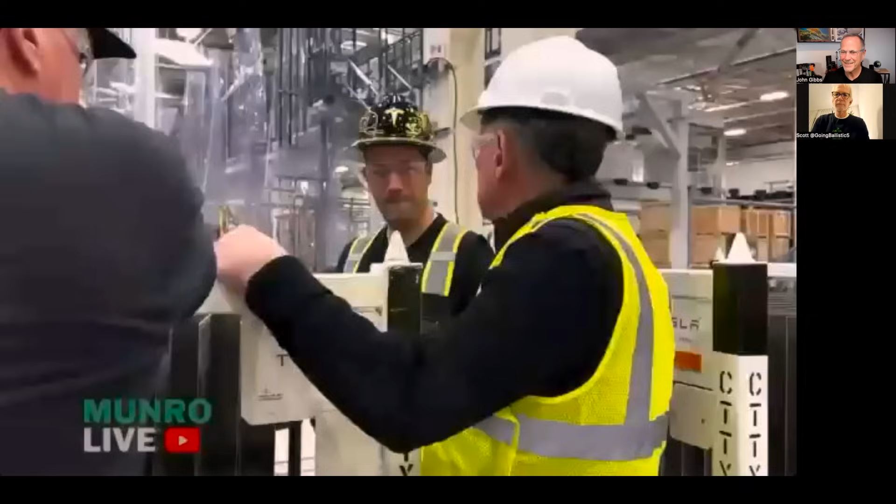Yeah, that's pretty amazing. You're using 2 of my favorite, 3 actually, counting Kuka. They're my go-to. Kuka, Schuler. Yeah, if I'm gonna do something, I hate screwing around with junk. And anytime a purchasing agent or one of those engineers with an MBA says, "Well, I got a good price on it," I have an expression. There's usually a reason. Don't save me any money. I can't afford it, and that's the truth.

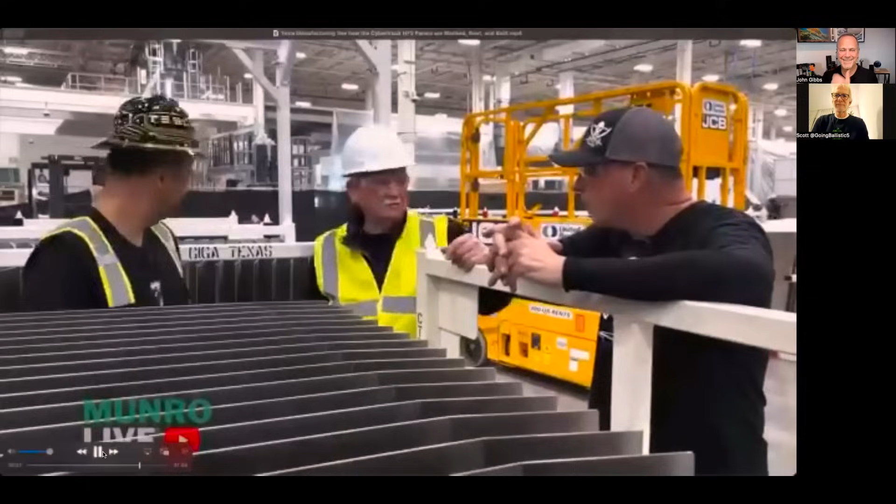By the way, these are 1.8 millimeters thick. These are the full real bulletproof. Everything else is 1.4 millimeters thick, other than the doors. Yeah. Well, you need that extra for the machine gun. Yeah. Well, the 1.4 is actually pretty bullet resistant.

Do you remember Salada tea bags? When I was a kid, my parents always drank Salada tea, and it was like a Chinese fortune cookie because it always had an expression on it. Right. I remember one of them that was on there was, "The one thing you can't afford is a bargain."

So that's exactly it. It's kind of true. It's because it's a bargain, you decide to spend the money, but otherwise you wouldn't have.

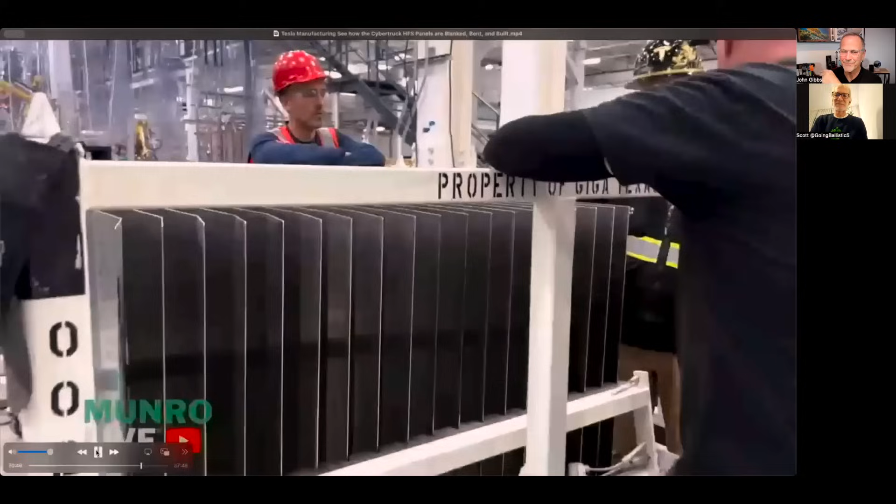But I think this is where he talks about the side impact crash resistance. It takes about 75% of the side crash loads right there, just through the panels itself. So that's impressive. So we wanted that extra thickness for the stiffness. I mean, that's just a crazy thing to think that somebody can T-bone you and 75% of that energy is dissipated by just that outer panel. Just the door, yeah. That's impressive.

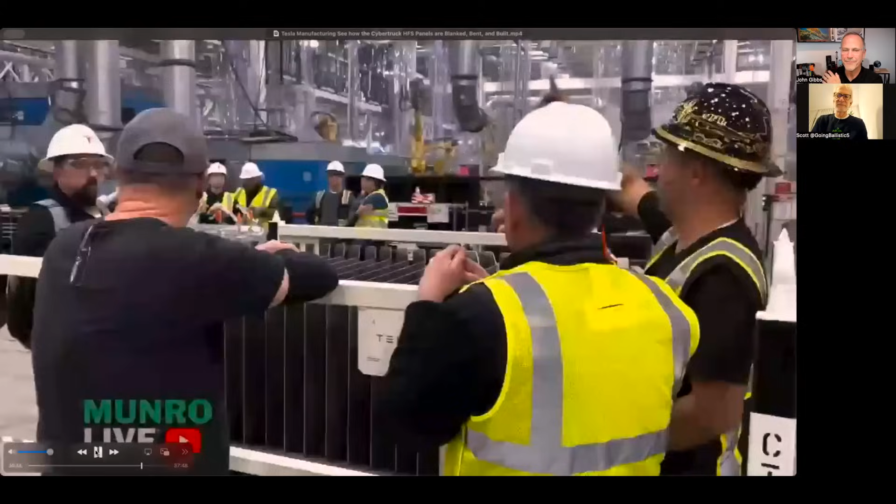So after it goes over conveyance, we'll go into the weld cell, and then we'll finish it. And then finally we get to welding. So that's one of the things I'm really interested in. How do you affix that to the rest of the door? How do we fix it? So we have the inner, you saw from downstairs. We have the outer. Now we got to put them together, without making any marks. Super easy, huh? Piece of cake.

But at least it's not aluminum to steel, because we were like, how do you weld aluminum to steel? And now we know, because it's steel to steel, you don't have to worry about the thermal expansion rates being different or anything else. Exactly. So we load the inners in here. Is this running now? This is all off now, right? He's going to see if he can turn it on for you.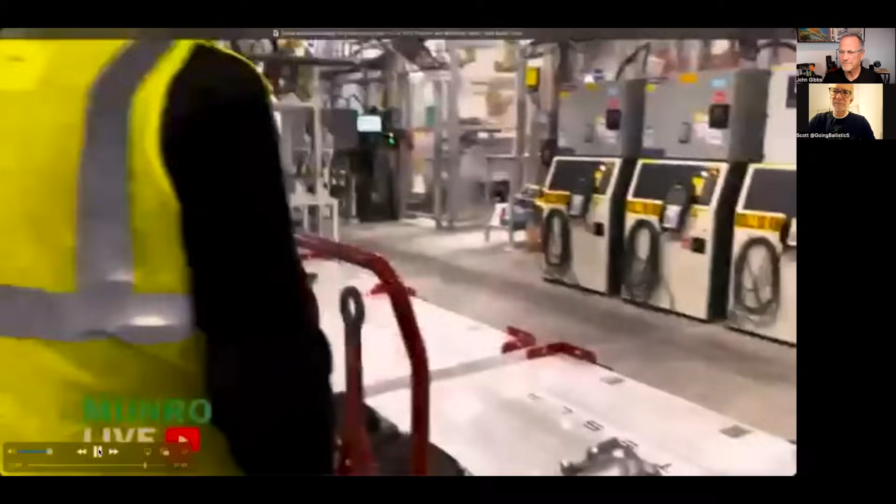So basically, we don't have any reinforcements on the exterior panels. We have a couple of hinge reinforcements just locally on the inner. So this cell here takes that inner panel and this hinge reinforcement and just welds it together. A couple of spot welds, that's it. Pretty traditional. But how do you do it without any marks? The line is full right now, so we cannot run it.

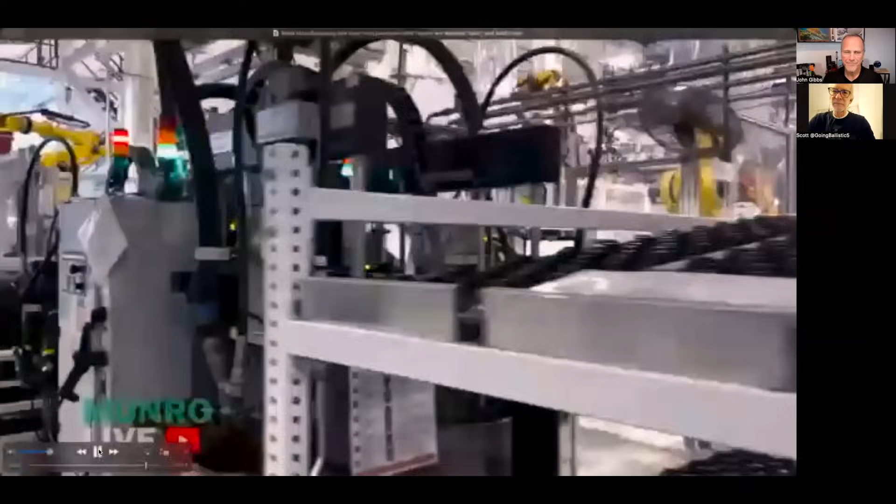So now we bring the outer in. Outer comes in here, gets loaded in here, and we have another laser booth, because the exterior surface was the most critical. We didn't want to get any burn through, mark through, see through. You don't want a blue mark either. So the tolerances have to be basically micron level precision in order to get the two together. Do you have the one part here, Aaron? Yeah, we got a part here. So this is all closed up laser, but the line's full here, so that's why it's not moving.

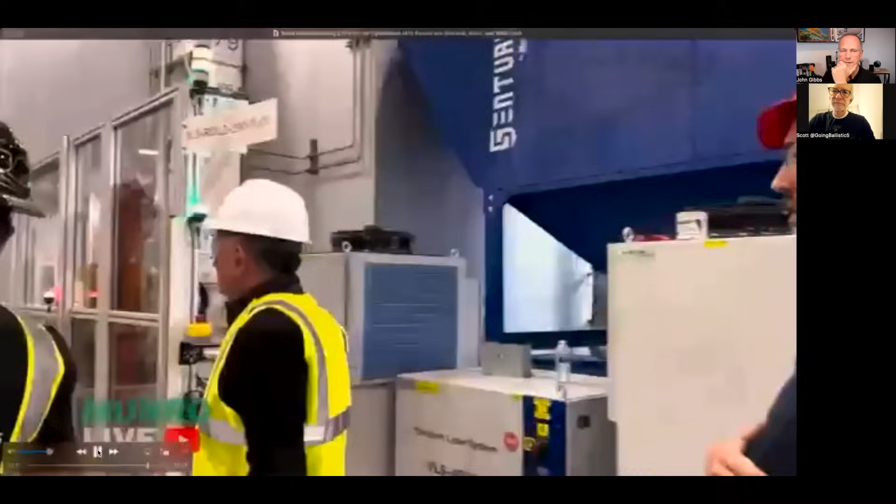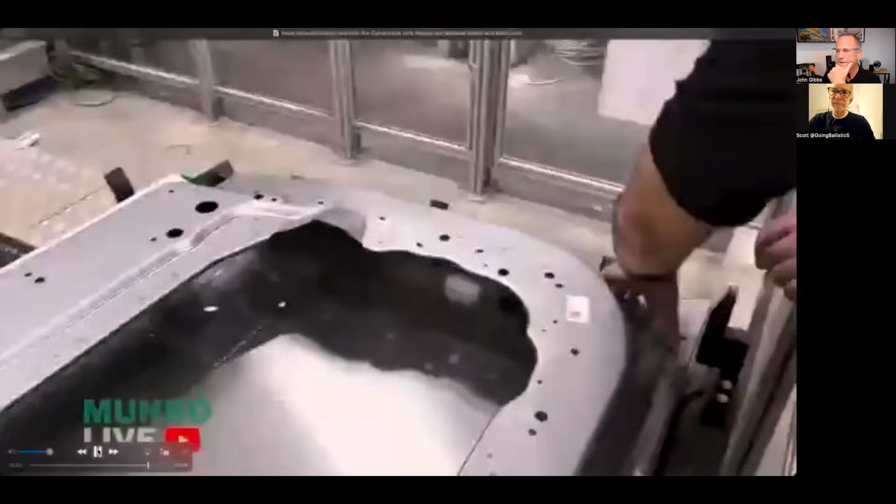So this is a part as it comes out, and you can see the laser welds here. So we actually clamp down on all the corners. Interestingly enough, it looks like there is a little bit of a clamping thing right there, or is that just part of the die itself? That's probably to hold it in place during the welding process, and then they get released. I was unclear whether it was just spot welds, or whether they actually do a weld around the entire ring of this. I think so.

But again, you're heating up just the inner surfaces, just enough to get the weld. 1.8 millimeters. It's got to go through like half of that or something. Because if it goes through more than that, you end up with some discoloration, the blue marking that Sandy was talking about on the other side. Which, by the way, with fancy watches they talk about heat bluing the hands; they just heat it up to a certain temperature and it turns blue. So there you go. It's going all the way around the perimeter.

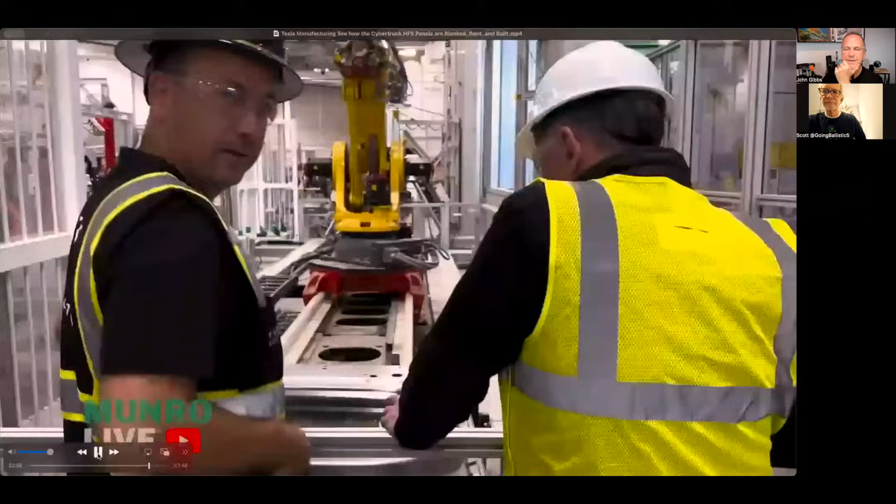I should really. I already got it now. Close. I didn't think of that.

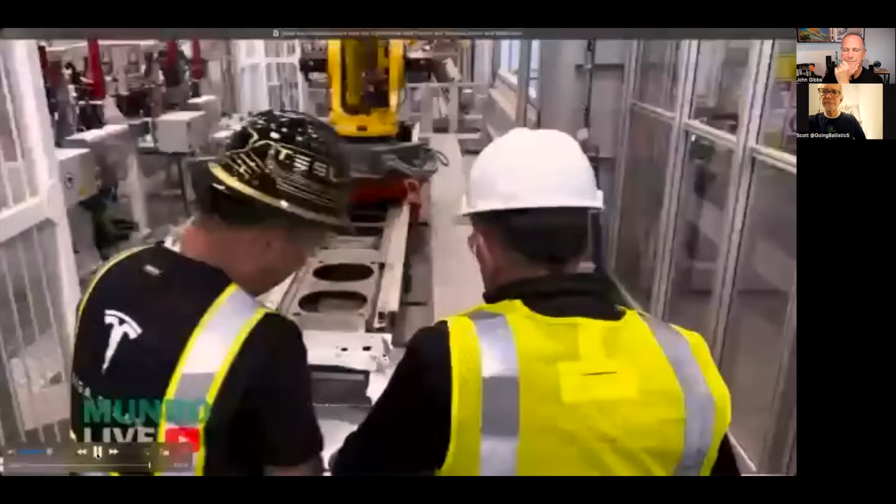So it comes around the perimeter. It actually bends this in just ever so slightly, gives it a little roundness. Helps with the A-surface light coming off the side, so you aren't edge to edge. You got a little tip. That's a cool design feature, that you don't exactly match up the edges because you'll see any kind of flaws, but they have that little rounding to it. We had to work for months on the current and the heat that's going in, so we don't get burn through with tolerance.

Yeah, trail off. But that's it. It's that simple, and we're done. But now you'll see, like, we do have some burn marks here. What we do is we go into laser ablation, and we just kind of clean it all up. And that's pretty cool too, by the way.

So any kind of marks they get on the inside, they just go zit, zit, zit, and they just ablate it off. But still, you see, it took them months to figure out the current and everything they needed to be able to get it to not burn through.

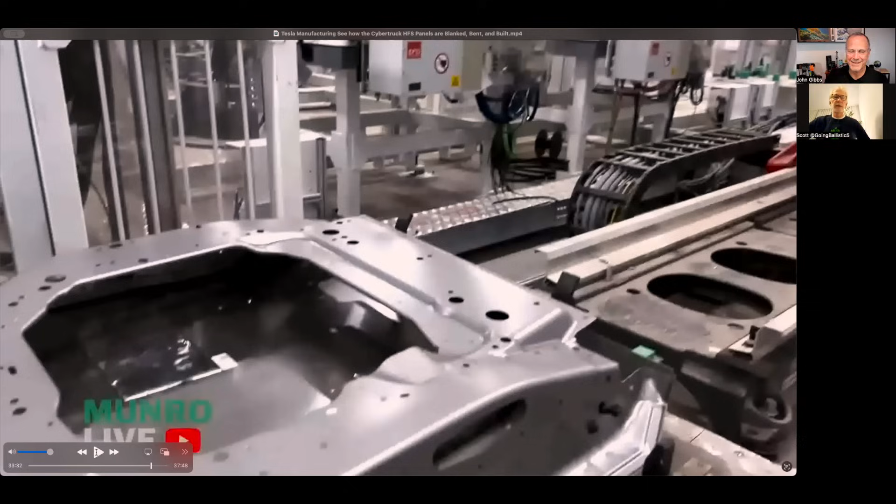Yeah, I mean, welding is a really difficult process to master, and I'm not aware of any simulation software that's perfect enough to tell you exactly what your settings have to be. Everyone's been working on that. They can get a good guess, but in the end you have to go and fine tune it, and they probably just had to scrap a lot of metal while they were working on it. It's like, nope, yep, nope, yep.

Also, this, as we suspected, is the sound vibration dampener, that little plastic. Exactly. And you'll see those on stainless steel sinks. And I believe there's some in dishwashers too, right? I think if you get a high-end dishwasher, there may be also in places like that. You can go to Best Buy and buy those, because sometimes the garbage disposal on your sink will vibrate and you just put that little damper on it.

Did he call it an oil damper or something like that? I think he's going to say that in just a second here. So I noticed you got two vibration patches. It's just a big oil can, right? Yeah, it's just a little damper. So I guess it's filled with some sort of fluid, some oil. It's an oil damper, yeah. So again, the vibration is just going to get absorbed by that.

And liquid is really good at absorbing vibrations because it doesn't have a resonant frequency, basically. And the other thing is the location. They figured out the ideal location to actually dampen the whole thing, where you have a point of resonance, and put it right there. You can imagine standing waves starting over here and going over to here, so you're trying to tune it exactly, which makes it quiet. That was going to be a question, but now it isn't. Okay.

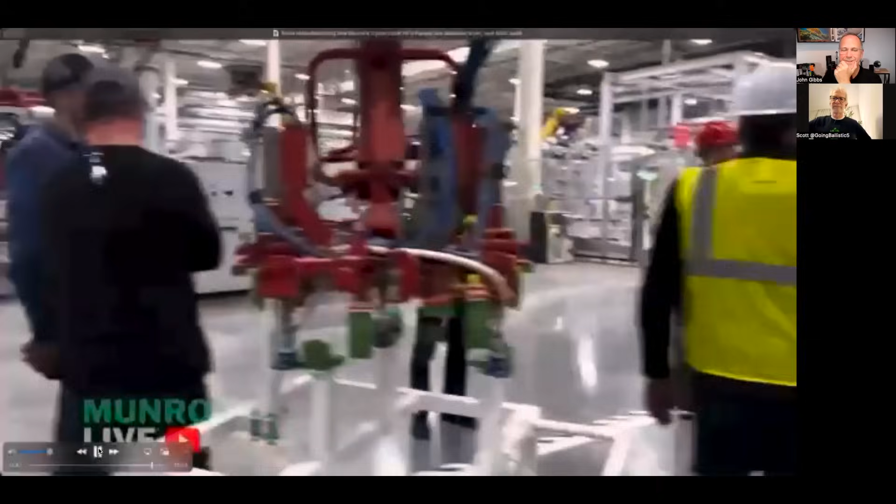So we come out of laser weld, we go into a holding cell because we have a buffer. And then we come over here to finishing. All these lines are integrated together by Bernard's team, because every station, you can see with the robots here, finishing station is KUKA, welding station is FANUC. They're from different companies because we like to spread it out to people that are good at what they do. And so then we come in here to finishing.

You want to explain how finishing works a little bit? Yeah, sure. So from welding, we drop it in our handover stand there. Robots will pick it up, drop it in a stand, and we got robots on the other side. They have a buffing pad. On the bottom of that head you see those Brillo pads hanging down there, actually three across. And all that does is very lightly go across, back and forth.

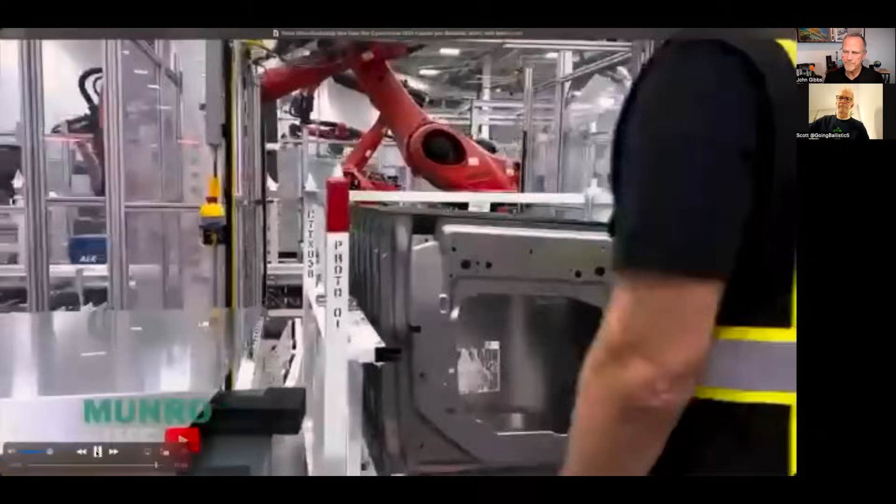It does a couple of runs over the complete door, and then they use a different type of pad for the other robot, and then this is a completed part after finishing. This is what it looks like, done and done.

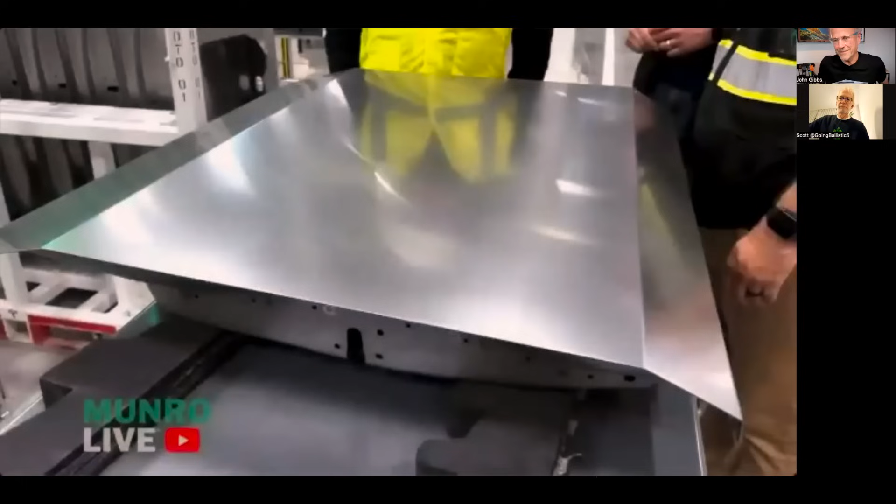So I think he talks to them for a little while longer, but it's just kind of conclusion stuff. But basically at this point, there's no paint, there's no primer. This thing gets put onto the truck and it drives off the assembly line, you know, that's it. They don't have to do anything else. So this isn't officially like unboxed, but it is kind of similar to that in the sense that you're building these parts without having to rework them afterwards.

And of course you still have to put in all the plastic inserts and all that stuff, you know, the door handle and all that kind of stuff. But in terms of the main structure of that door, it's just done. There's nothing else. It's ready to be mounted onto the vehicle. Yeah. Again, some nice little polishing and buffing that they go in there to make sure it has the right finish.

Right. One of the things that Lars was talking about there is that they will have these different integrators that are coming in and bidding for different parts of different projects, and they're usually specialists in some things. You'll have those who might be specialists in laser welding or a handling system. And whoever gets that, it's whatever your competency is, and a lot of it may be an integrator for a certain robot brand. And in some cases, the integrators may be told, you have to use this robot, which means they have to become familiar with more than one kind of controller. But it seems like Tesla's like, no, we don't care.

Is that because the two different lines are coming together, there's no reason why they have to be the same branded robot. They could be different. And if you guys that are running it are specialists on that, then that's fine. Now, of course, what that means is that within Tesla, you have to make sure there are people that know how to run those different robot systems. Because at some point, when the system is up and running, it's not the integrator that's coming out and playing with the robot. You've got to have your own people.